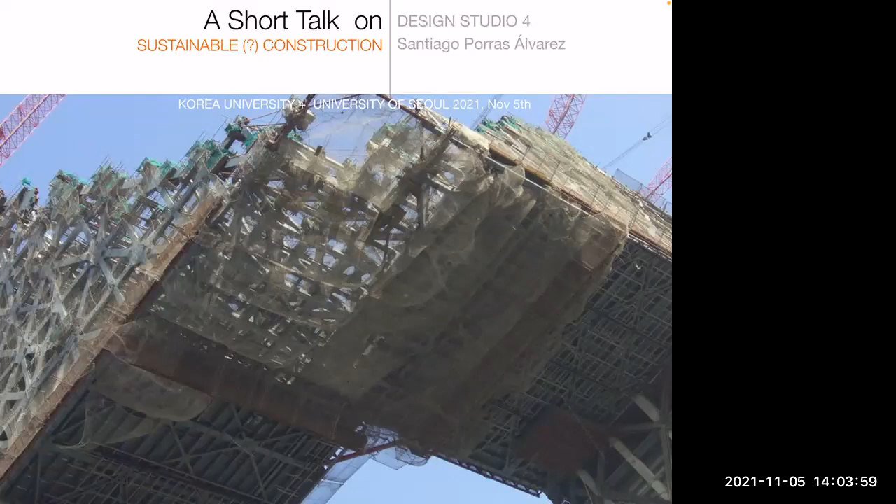Of course, on the cover we have the construction of Beijing's CCTV building, one so-called sustainable building. This is why the question mark comes in. Right now everything is sustainable, and we have to be a bit critical with those sustainabilities.

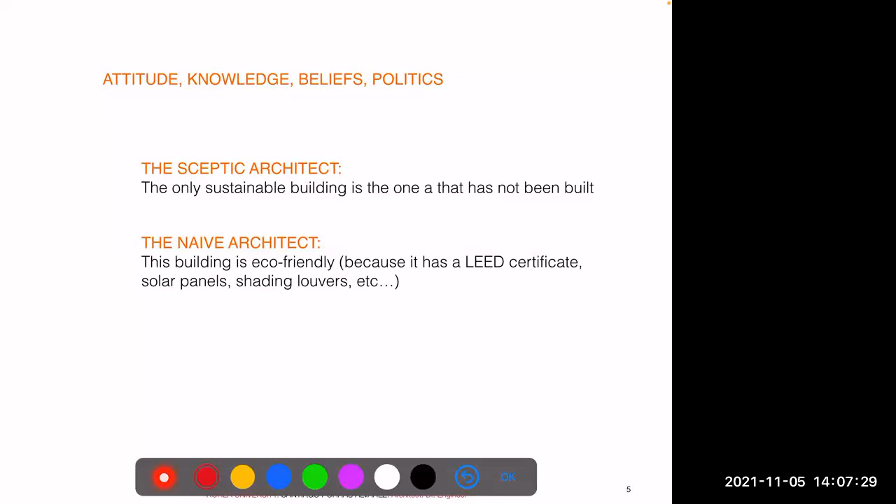We have the skeptic, the clever guy, who says the only sustainable building is the one that has not been built. Yeah, that's true, but it doesn't help us. Then we have the naive, to be kind, who says this building is eco-friendly because it has a LEED certificate, solar panels, shading, louvers. This is quite silly — it confuses gestures and additions with the real thing. So we'll try to avoid both attitudes and go to something more practical.

And of course, what gets published doesn't help. We have the comparison of the famous Seagram building, a masterpiece of modern architecture, which scores out of 100 points. The performance of the Seagram building is 3 — like the worst building in the history of architecture. Then we have the newest, World Trade Center Tower 7, scoring 75 — wow, 25 times better than Seagram. And this kind of success model gets LEED platinum and all the certificates you want. But if we compare it to the Chrysler building from 1930, it's only a little better. I'm not totally being fair because the Chrysler building has been renewed, but it's not difficult to match and even beat the most celebrated building. So there's something that doesn't work here.

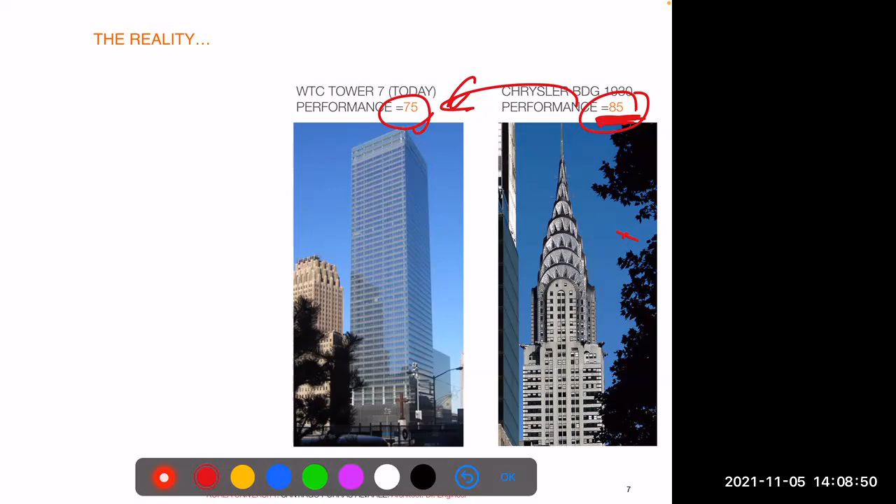So this is why you should be, maybe not totally skeptical, but quite critical about those ratings, publications, and victories of sustainability and eco-friendliness.

And then there are many things which are very difficult to categorize. I, on purpose, took this example — the Burgos Cathedral in Spain, which is my dad's hometown. This is from the 13th century, and it also has additions made later, as we all know.

So there are two buildings which are crazy — they are anti-economical, they make no sense, they would never pass... well, they'd never pass the LEED certificate for sure, but how can we judge them? There are points where a building has stood for over 700 years and become the identity of a whole community.

My dad and everybody in that town is very proud of this building, and they do whatever it takes to sustain it. Can we say the same about those towers, those buildings which are more the glory of the corporation itself? This goes beyond the case, but not everything that is energy efficient is just sustainable in itself. There are many more layers we really cannot comment on, but I have to say it because sustainability is a really wide subject and we cannot get too narrowed.

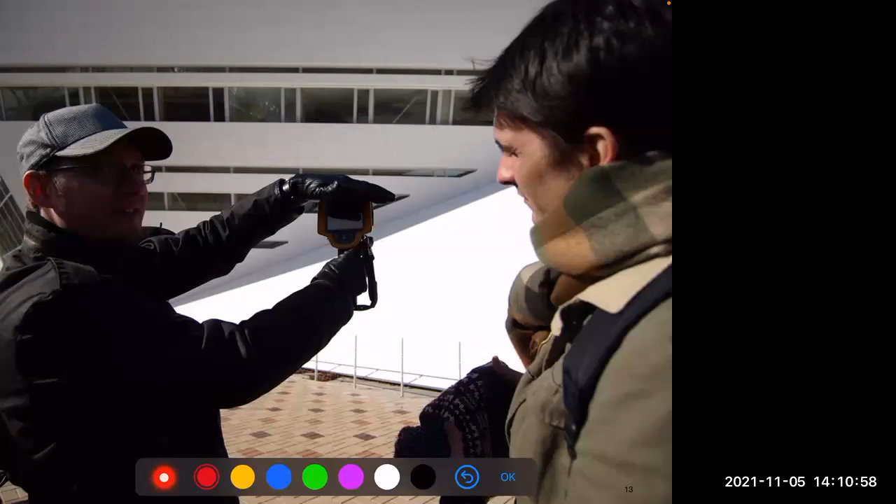The design has perfect natural light in all spaces without too much glare. The design itself took care of natural light, which we know is much better for human performance than any kind of artificial light. Here are the engineers with one of the students visiting the building, checking its real performance for at least two years after construction, because we know projects are not ideal, so very few times do you see that.

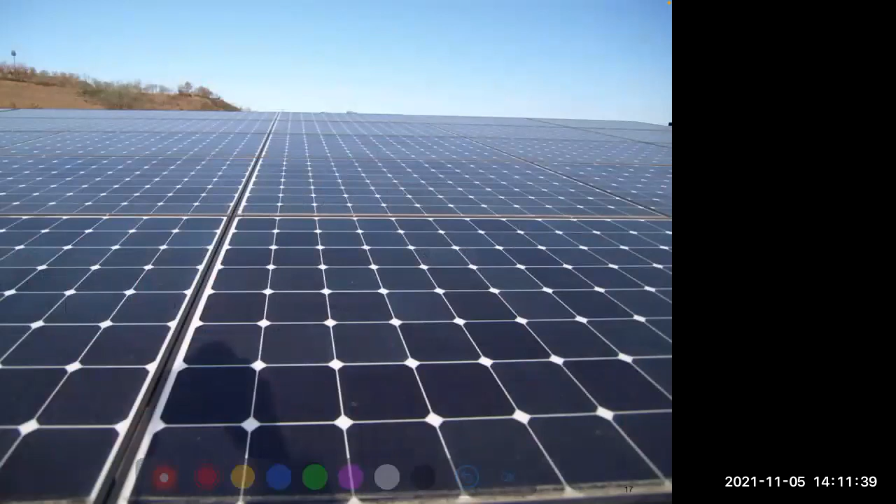It also has automatic shading on those facades which cannot be slanted, so you have automatic shading where you need it. That results in energy savings, plus there's huge insulation. So for the little bit of energy they needed, they have the most advanced systems of green energy and heat recovery, of course, solar panels and high efficiency climatization systems. That saving in active systems allowed for much more quality, much more efficient systems.

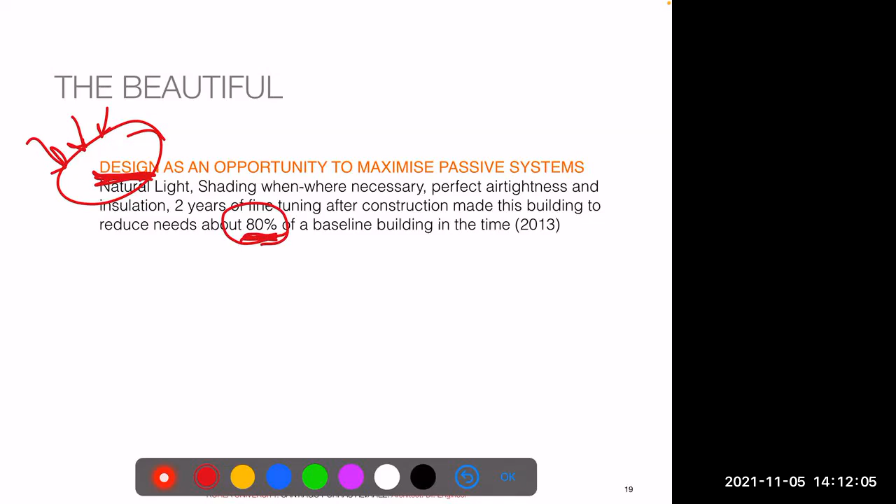So the summary is that design is really important. Before you do any calculation, design may help. In this case, they reduced needs by up to 80%, of a baseline of 2013, of course. But that means the remaining 20% can be applied to clean energies and higher efficiency because you need much less.

Something interesting is the radiant floor for heating and cooling. We are used to the Ondol in Korea, but the cooling actually works very well. If you can visit that building in summer, you have radiant floor cooling on the ground floor, and high-quality air-conditioning on the second floor. You will see the environment is totally different. And of course, it's automatic and so on.

But there are also drawbacks. The building is extremely complex to manage, and actually you need full-time engineers to make it work. That's one of the death points of many so-called sustainable buildings — people are not able to manage them.

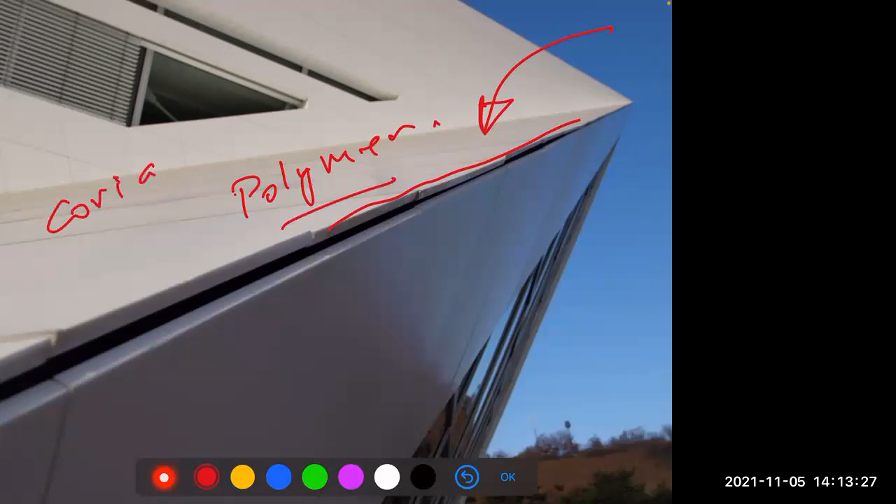From the exterior, one of the students, when seeing the building at first sight, said, 'This building does not look sustainable at all.' And the German engineer laughed. Well, why? It's not only not a perfect construction, which is a pity, but this is a very high-grade polymer — a Corian material which is extremely expensive but has a huge carbon and energy footprint. It is great — you have a ventilated cavity, it reflects light, and it's long-lasting.

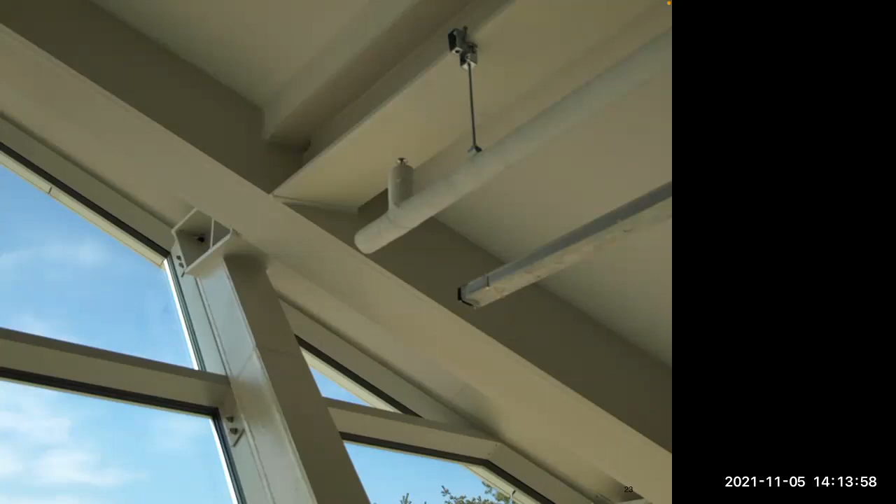But there is a huge accumulation of energy there that will be very difficult to pay back in the life of the building. And there's something surprising: the structure was not a German calculation, and we were all surprised — it was so extremely oversized. Again, this uses too much material, which has a huge footprint, just because of the habit of how things are done.

And we have this small problem we saw later: the solar panels are under the trees. There's no communication between teams, and they are mostly in shade, so the performance is terrible. Management is complicated. This is important because we build for human beings, right? And as human beings, we like to open the window when the weather is good, but then the system doesn't understand it, and the computers collapse, and you have a real disaster there. So it took some time to get used to that.

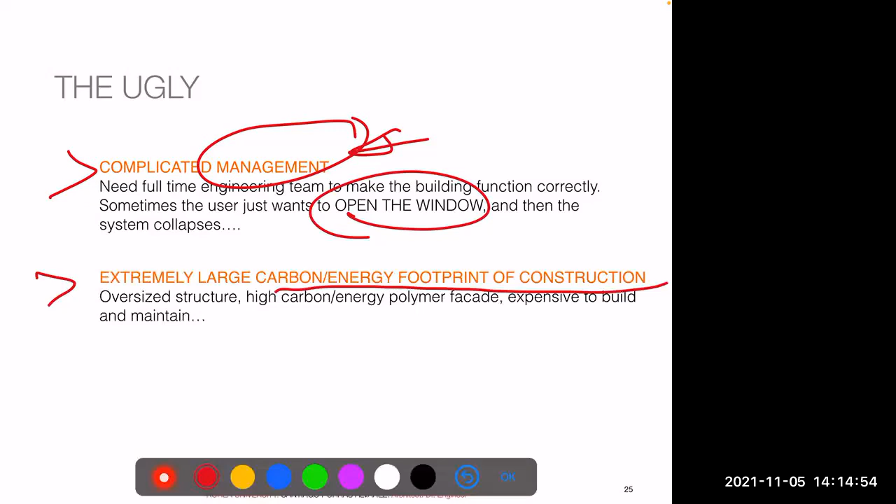Then the construction itself has a huge carbon footprint, and that's not told anywhere. So probably it will take over 100 years to compensate for that, and I'm just reducing — we have some calculations later. And of course, there's the poor coordination between teams, like the tree shading that happens. So what does this tell us? We have a building which is extremely energy efficient — that's a success.

But there are things that do not work actually, right? And it still accomplishes its function. So it's a didactic place, and still we can go there and really learn a lot about good systems. But is it sustainable or not? Well, it's very hard to give a reply, right? It's sustainable in some aspects, could be better in other aspects, but still it accomplishes its function.

And there's many things which are untold. This is like a gossip, so don't tell this out of the classroom. So the first project had an underground building because it's the most efficient thing to make. But government said no way. We need an icon, something flashy. People need to see it. We need a futuristic building. So that's a big drawback, which accounts actually for one of the drawbacks of this building.

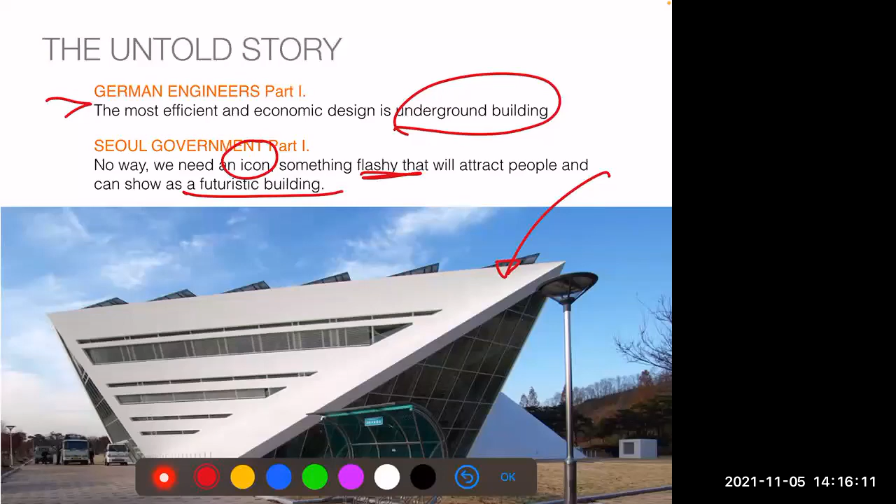Well, actually, the design, except for the graphic design, which is terrible, is quite decent, so I cannot complain about it. I wish we had more like this. And then, you know, the design is finished, all calculations done, we can continue on ourselves. And I hear this a lot here in Korea, especially. The rest we know how to do.

But then, come on, this is too complicated. Let's call back the engineers, right? So this in between also accounted for a lot of mistakes. And this is this kind of arrogance of thinking things are easier than they are. And the engineers came and said, okay, what happened to the structure? What is this, right?

So again, what's the question? Is this building sustainable or not sustainable? Actually, you cannot say just yes or no, right? So we have to see the context of this building, its function, and we have culture, economy, the ecology itself. So many things to speak about. So I wish we spoke more of levels or degrees of sustainability, right? And as in the case of this building, we have to make many trade-offs. It will be very difficult to always make the perfect project, the perfect design.

So the work of the architect, I hate to call us designers, but okay, the work of design actually consists of taking decisions, right? And the perfect project, I don't think it exists. If it exists, it's just an exception, probably a very unique happening, right? You always have to favor some things over others based on the context and the needs. So this is one thing I put in the lesson.

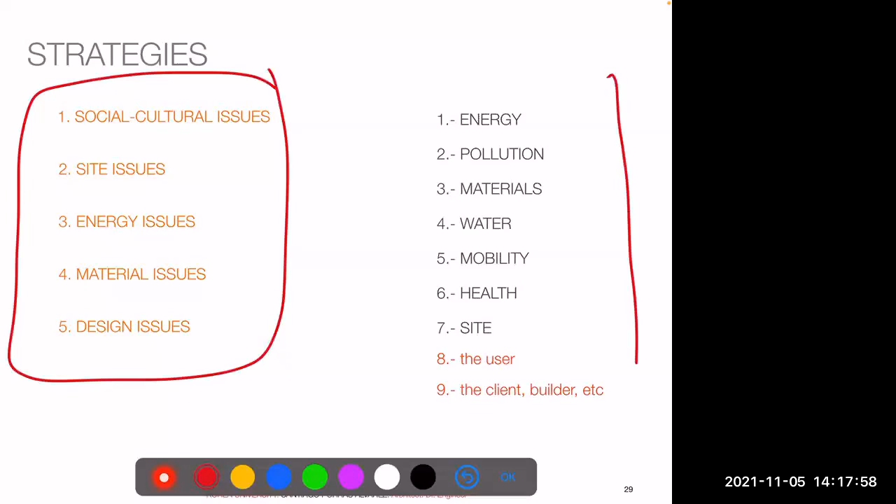So when I teach sustainability, I try to divide it into 5 chapters because I don't want to complicate too much. So 5 is compact. In general, we speak about probably 7, 8, 9 categories. And with relations, everything is related. So it's very hard to isolate problems and treat them separately, right? Everything connects to everything else. And the user, the client of the building, is one of the most often forgotten. So we think everything is design, and as we saw before, not everything is design. There's many things involved there.

Well, still things missing around here. Okay, you can even complete this. So let's go to our project. So you say, okay, it's a very nice talk, but we need to make our project. We need to take decisions to have a good grade in Design Studio.

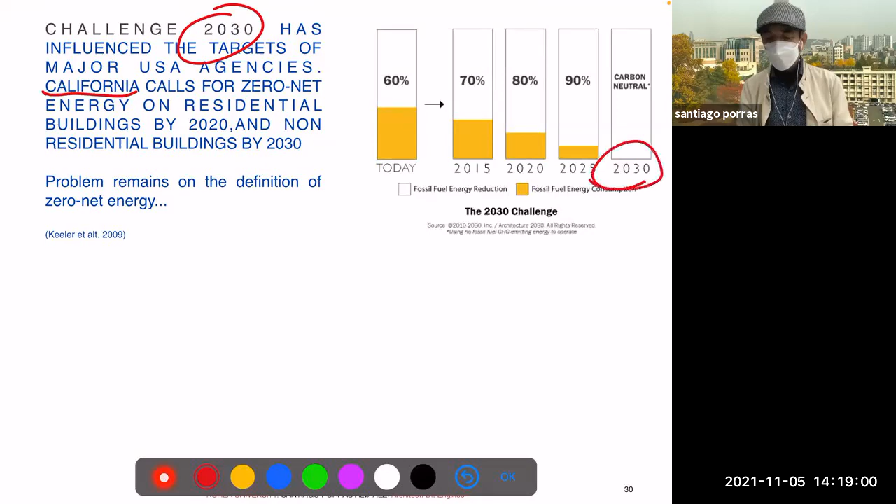So one thing which is upon our heads: the 2030 was something which started in California and was somewhat applied to the rest of the countries. So the idea was to be fully carbon neutral, no fuel by 2030. And the idea was to design better and then to apply, as in the case of the Solar Energy Training Center, green energies to account for that, right? So that's energy and carbon neutrality. Actually, that called for most countries to take decisions to have neutrality by 2030, and Korea is not an exception. We are in 2021. So that means that when you graduate, you will have to comply with those things.

And we are struggling still with the regulation we have now. So it's something serious. We have to save a huge amount of energy. And that's the point. And saving energy means also less carbon emission. What can we do? I will tell you something which is not so much publicized, I don't know why. This comes from research we published like 5 years ago. And you don't need to go into the small print.

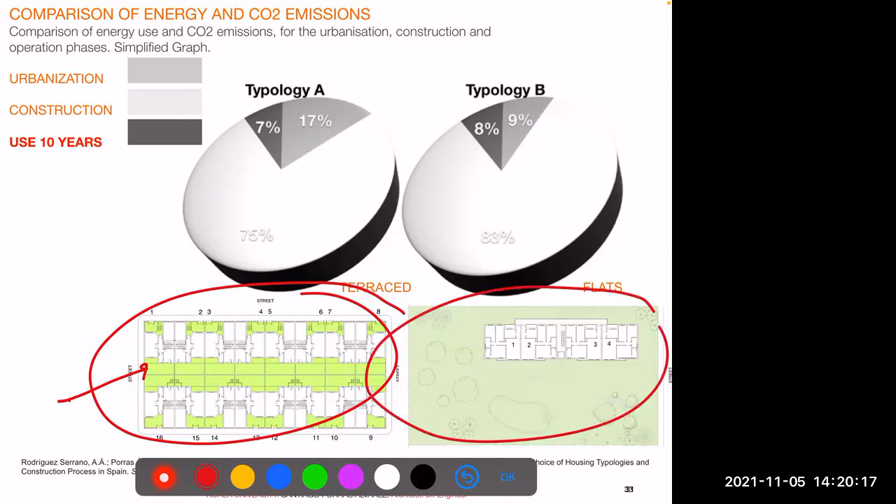We just compared a block of one-family houses and the same number of living units in a small block, right? We compared all the costs in carbon footprint and energy of urbanization, that's making the streets, infrastructure, building, and then the use over 10 years.

The use of 10 years is easy to understand, but also after 10 years, you have renovations, right? And that complicates a lot the calculation. And this is for Spain. In Korea, many renovations start in year 1 or year 2. So that's really hard to calculate.

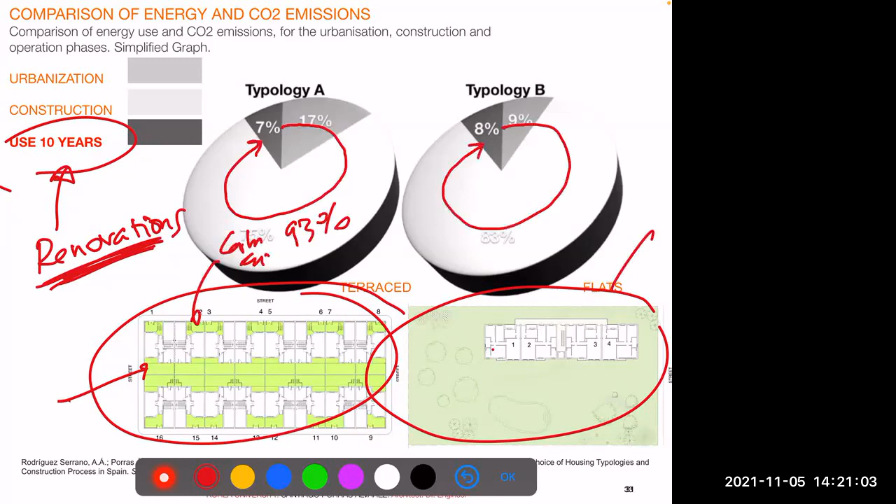But what is surprising here is that urbanization plus construction accounts, in the case of terraced houses, for 93% of whole carbon and energy. In the case of flats, a bit less, but still it's 92%, right, of the total. That means that while we always speak about improving the 7% or 8%, which is the life of the building, say we become even 20% more efficient, that will have a minimum impact, while most of the harm is already done. In summary, it's 92% during the construction.

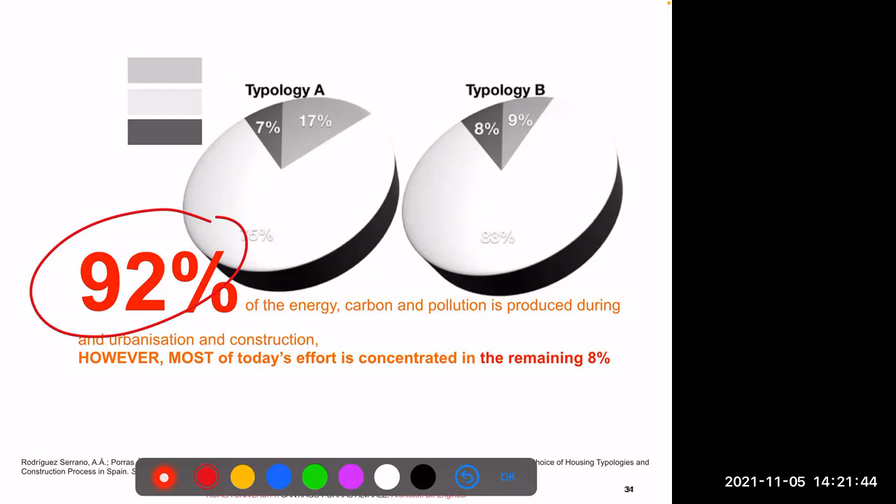That means that the way we design, the way we detail, the way we decide in our project has much more influence than the real performance of the building later in its life. And the research is consistent with it. This is another publication which says the same. The moment the buildings are more energy efficient, the energy lost in the construction is much bigger than the one in the exploitation of the building. And of course, we have to consider the demolition, which is another matter which goes beyond us.

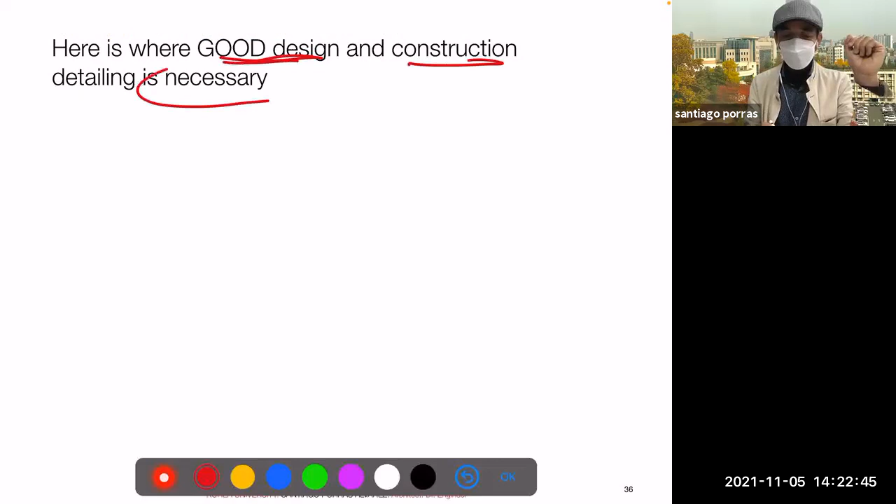Okay, so you know now, if you're sincere about improving the environment, how serious is our work as the ones who plan and project the buildings which are built in the future, right? Because we account for most of the pollution. So good design and construction is really necessary. It's not something that we take for granted and say, okay, we just copy things. We really have to make an effort to make construction better. And not only our detailing and our choice of materials, but how construction is done.

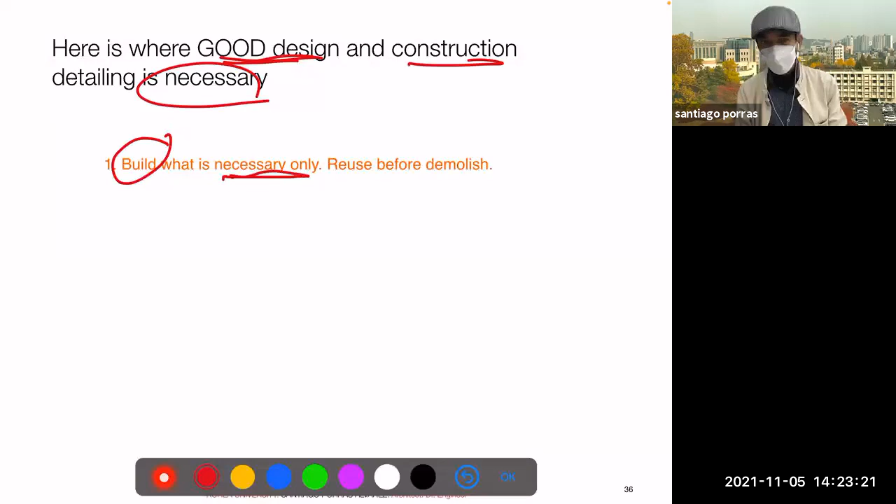You will not see electric powered trucks in the construction site, right? I think it's dirty, inefficient, and enormously polluting. And that happens also with the fabrication. So we have a lot of work to do. So bottom line, that's very obvious, but we have to make sure we build only what is necessary, right? And reuse comes always before demolition, if it makes sense, of course.

Second, building to last. The longer the building lasts, the more we compensate for that initial cost. In the calculation before, we need over 100 years in that Spanish calculation to catch up with the initial footprint, right? Just by energy savings, and probably more. And the more efficient the buildings are, the more that footprint is negative. And that goes to the design. So we have to choose our materials very carefully, both for footprint and life.

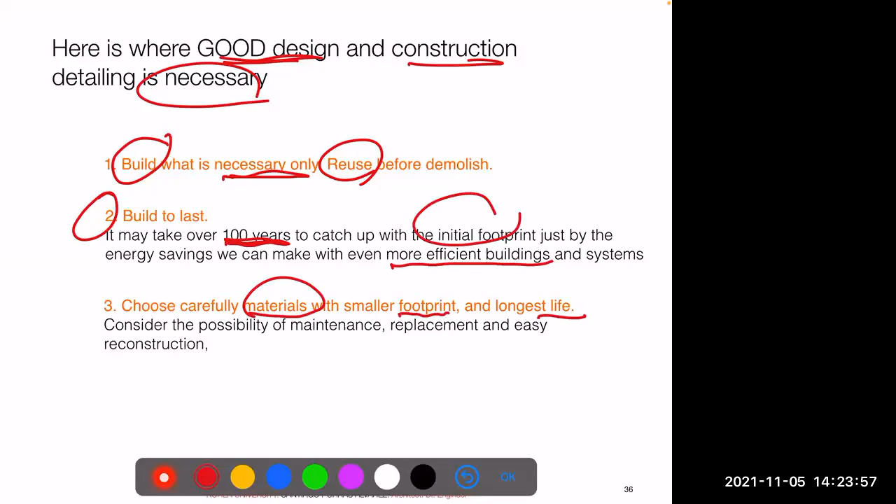And that means also maintenance, possibility to replace, and not reconstruction, but deconstruction, right? This is a concept I don't have time to see here. Here we can go only over general things, and I think I'm extending too much already. But as it happens with cars, the easiness to take one piece out and replace it by a new one is something that many industries used to do, right?

But in buildings, we are now renewing the facade in the building we are in now. You have to make a hell of a demolition, a real mess. And I wonder if the result will be better than what we had before. So things to consider. And then again, I think this is cultural. What is the benefit of rebuilding every 30 years? In Europe, people cannot believe that those apartments built in the 1980s are, in the 2010s, demolished and rebuilt with a quality and a design that will probably need to be demolished in 30 years, because the quality is so low that those buildings grow old.

So we have strategies. First, passive design, right? Once we choose our materials. And the example of the Seoul Energy Dream Center is great. You have the correct use of sunshine, shading, natural light, very important, ventilation, insulation. So in general, you can reduce the needs by 70% or more, only by these strategies, right?

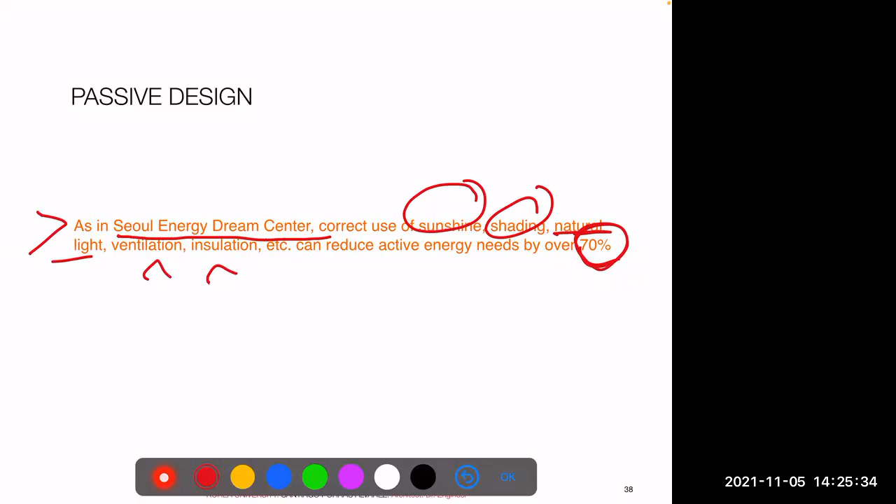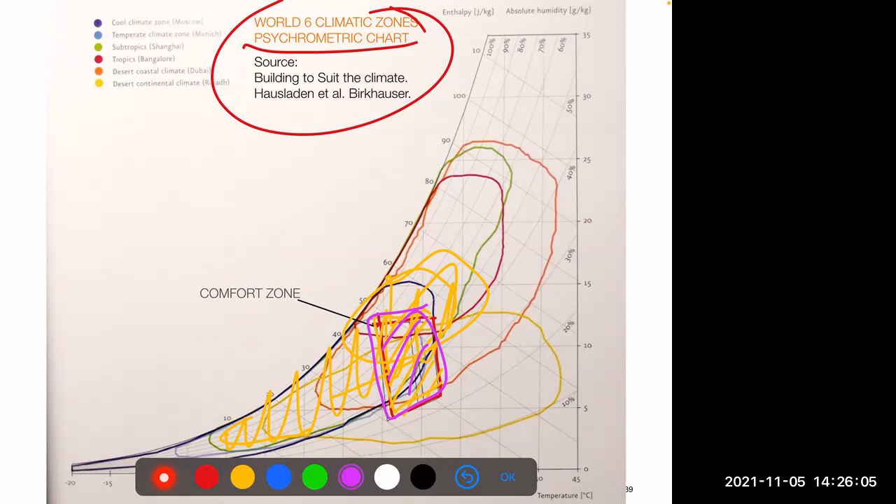And well, it's taken from one book, but that psychrometric chart will help you. So we have a quite wide comfort area. Seoul is a bit difficult to catch here, but probably it's overlapping several climates. Maybe it's around here, right? So in a great part of the year, you can just have a perfect environment without adding active energies. So it would be nice that you are familiar with it, and give the possibility just to open the windows, to use the daylight and things like that. And that makes for a big saving, right?

So as I said, there's no way to give you a kind of system to design sustainably, but I can give you some points, some hints, which affect especially design, that may help you. First is the excavations, right?

We start from excavating, and underground buildings, as in the case of Seoul Energy Dream Center, would have been nice, but how many basement floors do we need, right? What happens to the underground when we excavate? And what happens to the debris from the excavation? There are things you have to consider when you plan those huge and beautiful sunken gardens and those underground spaces for more efficiency.

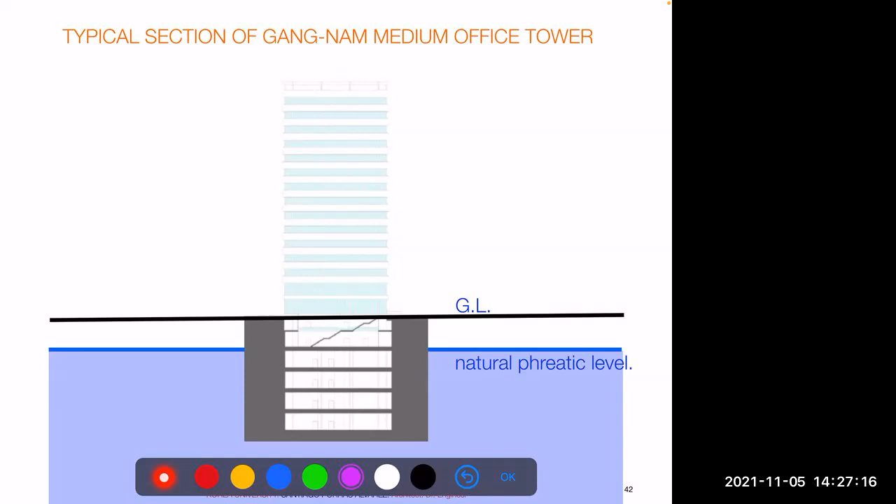This is the section of a typical medium-size tower in Gangnam. Gangnam is riverbed. So you have probably 4 or 5 basements under the water, right? How do you deal with this? The only tool we have now is to pump the water out. How much? We don't know, because we have thousands of buildings doing that.

But if we go to the published material of the Seoul subway, which uses the same system, pumping 24 hours a day, 7 days a week, lines 1 to 5 pump 70,000 cubic meters per day. That would fill the needs of a population of 500,000 people. And deeper, lines 6 to 8, almost 3 times as much. So altogether, in one day, the needs of 2 million people, right?

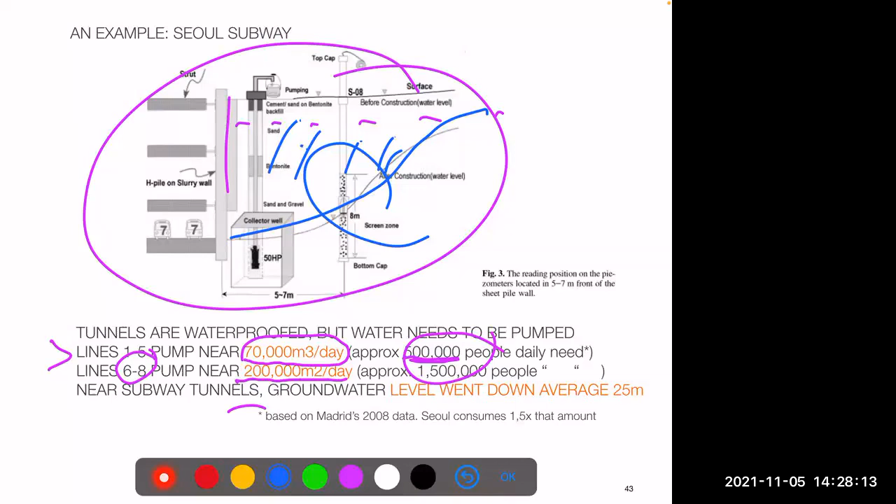And not only that, but when you pump water, the natural ground water level goes down. So you have a lot of imbalances, which alter the geological system. So the decision of excavation is important. And I bring one example. What happens to the soil?

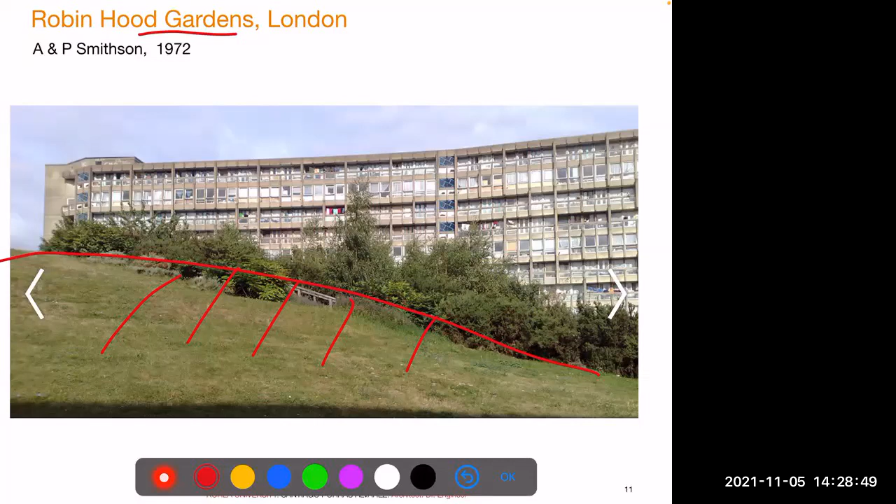Excavating by itself is not bad, but you have to deal with a lot of debris. Otherwise, it will have to be transported to the sea, most commonly, to make Korea larger and greater, but not necessarily more ecological, because that's again changing the ecosystem and increasing transportation and costs. So that's one point.

Second, structure is the second element we build. And probably we can go back to old materials. Those very cool buildings which challenge physics, what's the real cost, right? How much is the cost of building higher? And how healthy is steel? Some questions. There is a rebirth of timber use. Curiously, we found out this great material. And I brought one example.

Yoshiaki Amino is one of my friends in Japan, very much an expert. He studied in Europe with the best experts in timber. 6 years ago he did a very nice house in which structure, partitions, facade, envelope, even roof are done with the same timber logs. He went to the workshop and said, give me the timber nobody wants, the one with the most defects, the ugliest and the cheapest. So he cut it in standard sizes and they devised a way to put them together.

And this helps to make a building. Of course, the design has a lot of very interesting things. But the point is we have only one material. Of course, you have waterproofing and some other things, glass also, things like that. But that's enormously ecological in a place where you have overproduction of timber, for example. That's another matter.

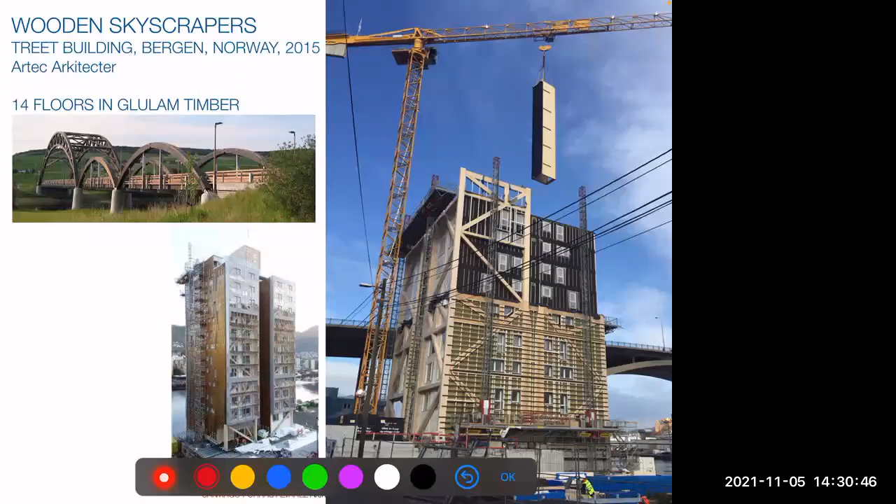And apart from Japan, we have to go to Northern Europe, right? Norway, all of Scandinavia have a lot of experience with timber. So right now, the tallest timber towers are built in those areas. We already had one interesting building 6 years ago. Just this summer, we have one of the tallest buildings. 20 floors is really amazing. So I encourage you to research this, right? You don't need to go very high, but you have many possibilities.

And this is just glued laminated timber and cross laminated timber, plus some steel, right? And some concrete at times. Not sure in this case, but sometimes you need concrete to achieve some fire protection or insulation, and sound protection also.

But that's another thing. But most of it, again, it is amazing. We can have 20 floors with material. And who knows? Toyo Ito.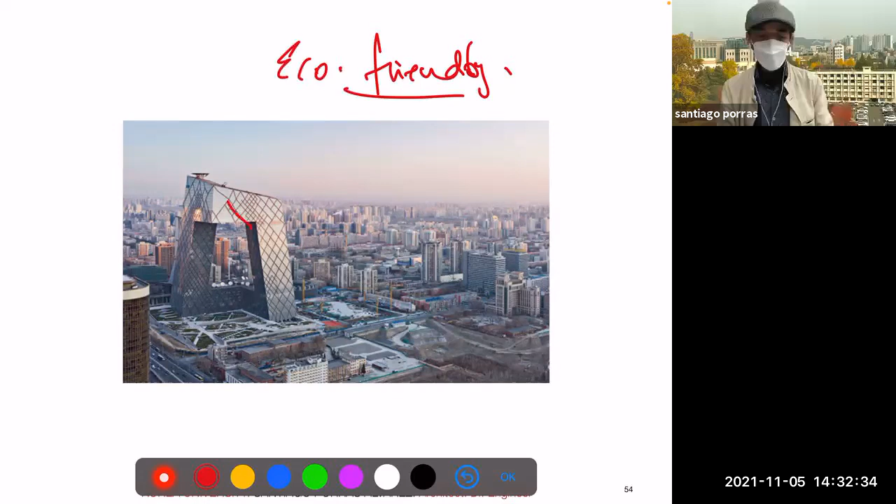If you go to the CCTV and OMA, they did great. And it's fantastic because you see the facade is just expressing the stress of the structure. So the building is expressive. I don't know the guy who works here, he's very happy about it, right? But what is the reality of this?

Okay. The amount of steel used here is humongous, and you will very seldom see these photos. Some guys said this is kind of the steel savings bank of China. When you need steel, you demolish this building, you have steel for a long period of time. And then this is what happens. You have a very expensive tower, but to make it work, you need really useless space, right?

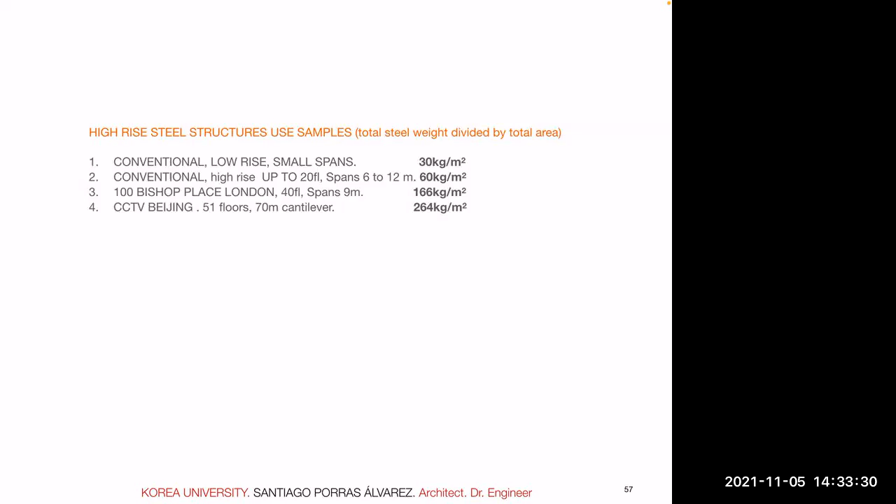And again, compare this with the cathedral we saw before. Right? What is the greatness of those spaces? So, let's go to just comparing data. And I don't know how much we can believe the published data, but a conventional building may have as little as 30 kilograms per square meter of construction. Probably up to 20 floors, which is the usual high rise here, maybe twice as much.

One of the buildings, Bishop Place, I think this is Renzo Piano, which is quite slim and quite well designed building. It has already almost 3 times as much steel. And CCTV Beijing wins all of them, right? So it's like almost 8 times as much as any other building. So you have to be very aware of that.

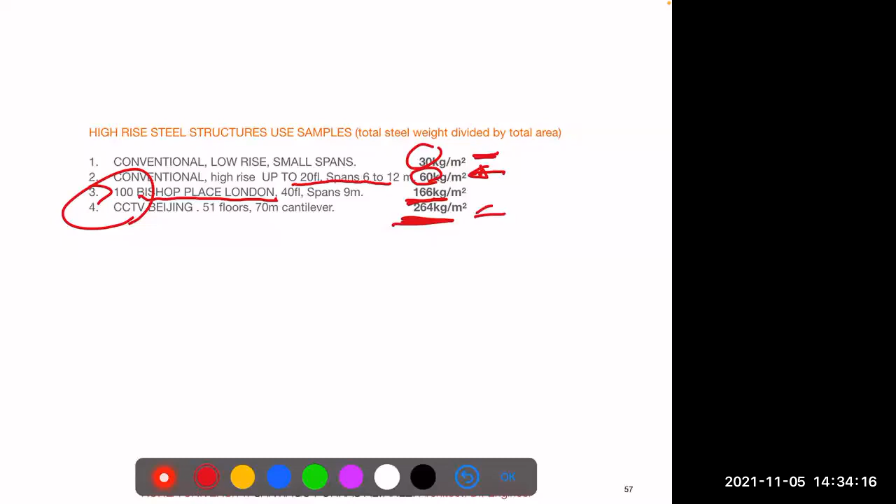Again, there is nothing intrinsically bad in doing high rise, but sometimes we have to see what's the benefit of those crazy buildings we see around, apart from publishing and the glory probably of the designer himself.

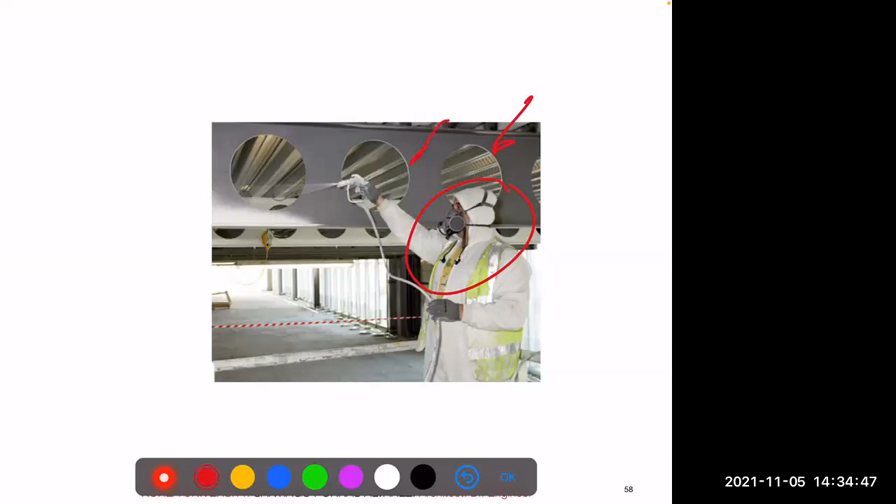And there's one more thing. Steel is very safe and unshakable, but you see how we apply the fire protection systems. Fire protection systems often have very nasty chemicals. So we have to be careful when we apply them and how we conceal them during the use. So we have those beautiful beams and columns, which better we have to hide if we put those materials on them, right?

And there's not only that, steel needs painting. How much? Because painting, again, is one of the most polluting chemicals on Earth, right? Grenfell Tower has to be painted every 2 years. It's no less than 50 tons. How about another of the towers, Leadenhall Tower in London, one of the new ones? I found data. It's 500,000 kilos of paint.

This is about 3% of the structure weight is painting. The good point is that this paint probably will remain for a long time. You don't need to change it every 2 years, right? But it's something which we have to be aware of.

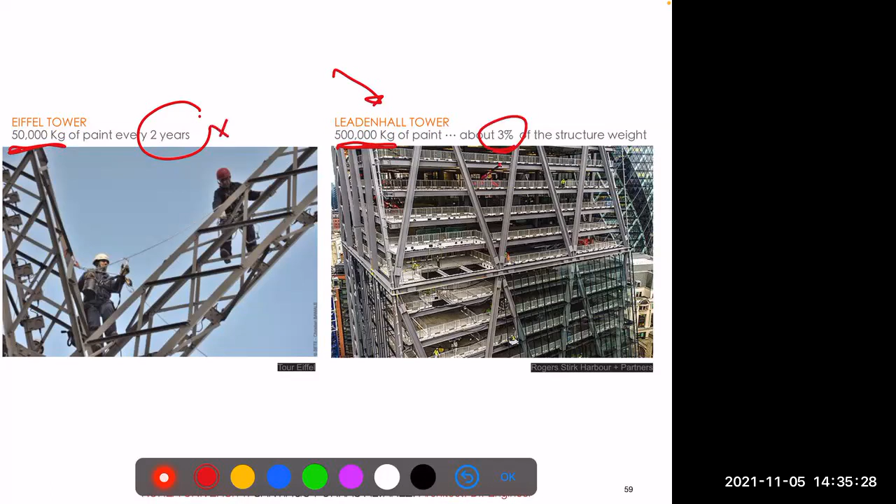Let's go to the envelope, which is the next part where we work. And because we have not much time and I don't want to overwhelm you, I left out all the interior materials, but actually interior is a big thing and we create the spaces, so we should talk about it, but okay, we don't have so much time.

Again, there's a lot of publications, so I encourage you to find information, to get educated and use the handbooks. This is one very popular example, Building to Suit the Climate. This is mostly a handbook, right? And you don't have much theory there, but it's kind of useful. There are plenty of those for you to become better.

And then you have a set of strategies you can use with the advantages, the inconveniences, how they could adapt to different standard climates in the world. This should be the starting point, right? And again, you have probably all possible standard strategies, but not always they are positive or necessary or adequate. So you have to really educate yourself. There's not any pride or benefit in being ignorant, right?

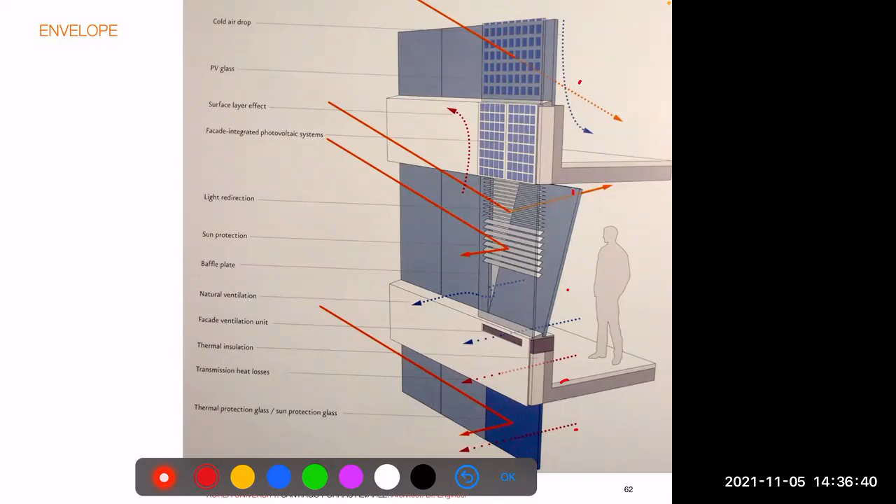So really, you depend so much on your own knowledge and understanding of things. Then the handbooks help. I will give you an example. I'm very shy to show my work, but I did this in 1985. In 1985, I had just graduated, so I did not even know the word sustainability, because actually I think it was defined a year later. So it's a small house for my family.

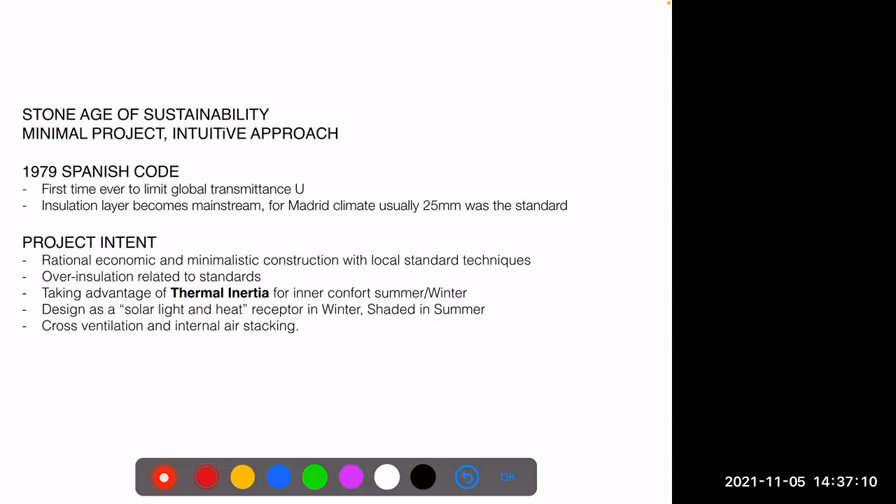And at that moment, I think it's common sense. You look for sunshine and try to put in a lot of insulation. In 1979, six years earlier, it was the first time we had a code limiting the transmittance, the U-value. At that time, 25 millimeters of EPS was the standard. Before that, we never used insulation, right? Things changed so much in those years.

And the intent, of course: minimalistic construction, standard techniques, over-insulation for that time, thermal inertia, because the difference of temperature between day and night is enormous there. To have solar light and heat in winter and shade in summer, cross ventilation and stacking. These are things that I think are just common sense, right? I feel shy just to repeat it. It's the kind of thing that anyone who ever lived in a house should know.

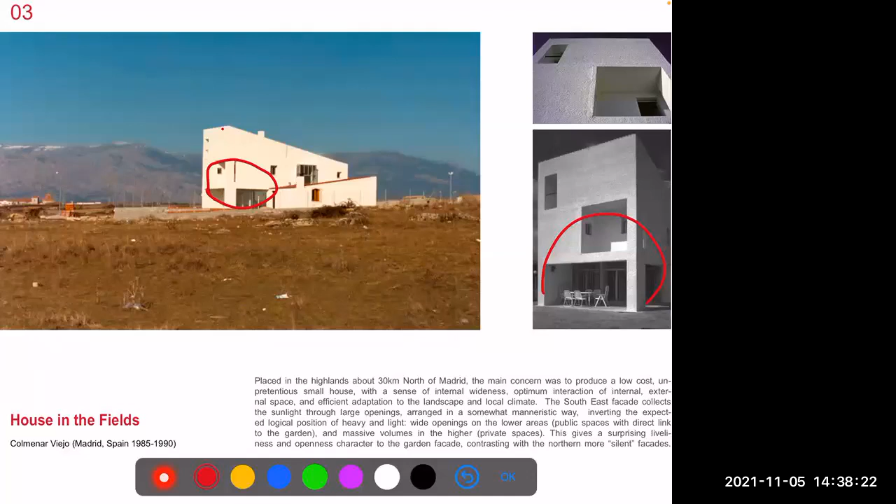The building is quite simple, actually. It's just a very simple volume. Open mostly to the south, southeast, right? The north almost completely closed. The design did not calculate the shades; that's the intuitive thing. And the thing which was unique here was the section. It's very clear, I did it by memory.

It was just a load-bearing wall in brick, 1.5 brick, 32.5 centimeters, an air layer with I think 5 centimeters of insulation, and then an outside brick with render. So the insulation part was on the outside. You have maximum thermal inertia on the inside, right?

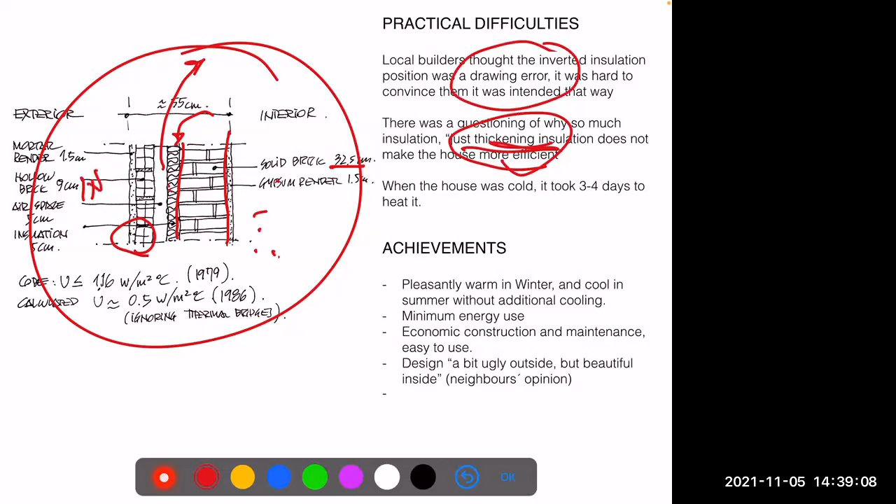At that time, the construction company said this insulation is too much. What is the need? You're wasting time, wasting money. And they thought that I was mistaken, that the interior was the exterior, right? I had to tell them, no, we're building the opposite way this time. But actually, it works. It consumes very little energy. You have a very nice climate, and it's extremely easy to use and cheap.

And people, the neighbors, said the outside is ugly. But I saw the inside, and it's so beautiful. I didn't show the photos of the inside; you may have a different opinion. Right now, we sold this house, it has its third owner, and it has been renewed. That means after 35 years the house still keeps its life and we don't need to demolish it. Well, not because of me, but now life is much more complicated, right?

So we have to design good envelopes, but we have a huge amount of challenges. And one is the codes. The codes help, but they are not the solution. They are the bottom line. As we did in 1985, sometimes you have to think away from the code and try to find the ideal. Also, you don't always get it right. This is something that happened a few years ago.

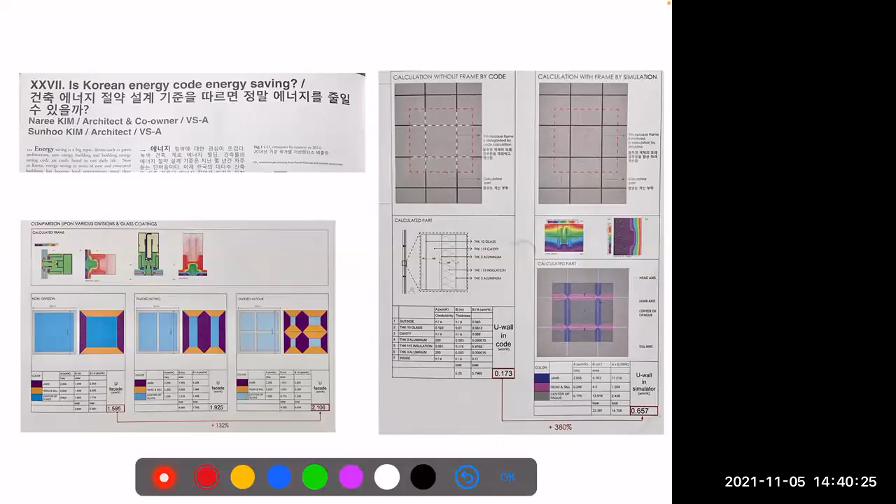It has changed, but Naree Kim and Sunhoo Kim, friends working here in Seoul, questioned the regulations because the simulations did not match the code at all. They found out that the code was very insufficient. Where you had a U-value of 0.17, actually the value was 0.6; you had almost 4 times as much energy loss. This has been fixed, but it's good that somebody thinks beyond what is published. Don't think the codes are always perfect; we should always try to improve them.

Second, as we said, design is one thing and construction is another. Design is about intention, right? In Spain, we like to use the word project. Actually, the design studio is projects, because this is a projection into the future. It's like you have the future and you draw it now. So you're advancing the future, you're guessing the future.

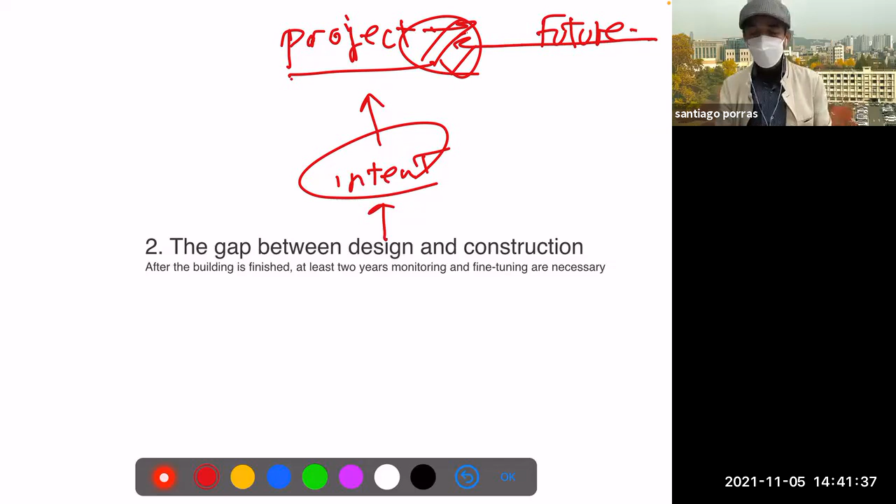That means the future is something we can only guess. So construction and how people use the building, right? Construction and use are something we never know. So we have to be very aware of that. No matter how strict the code is, no matter how perfect our simulation tool is, simulations are always simulations. Reality is always reality.

This is what happened, and I think it's one of the good points of Seoul Energy Dream Center. It was checked, and it had to fix a lot of things. This is one of the most embarrassing examples, but it happens every day, right?

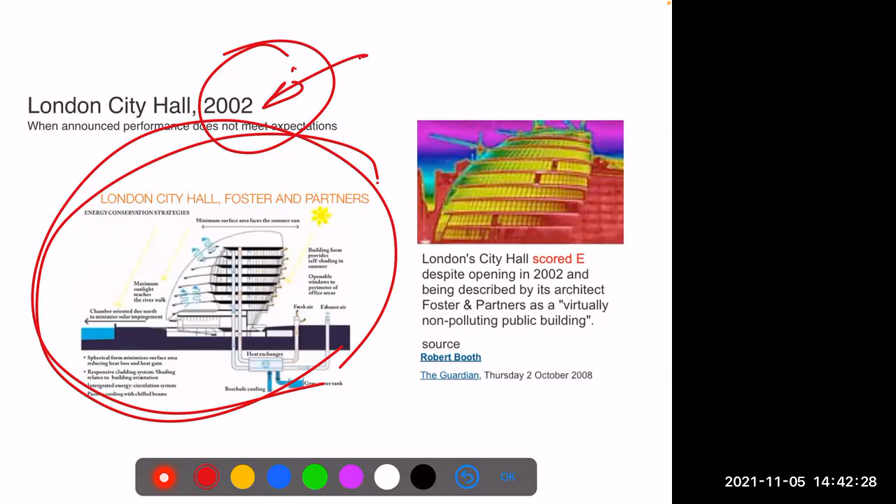Then we understand that insulation is the base. This is one of the important things to keep the energy inside, but our technology is quite limited. We are almost at the limit of what we can do with the insulation we have.

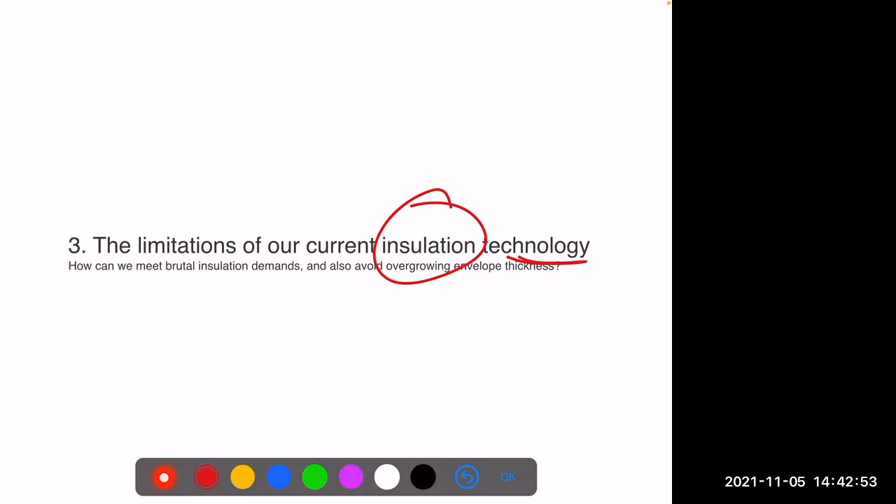Of course, we have foil insulation, but I cannot help you here. I have received visits from sellers since the late 1990s telling me this is great. When I ask for the certificates and experiments, they never give them to me. And this is what they use in the space station and so on, but it's very specific, very much experimented and a very controlled setup. Buildings are a mess. So the bottom line is that foils need to be in an enclosed cavity. And even so, US codes give them a resistance of 1 for cold regions and 2 for heat, apparently it works better with heat. But again, this is just codes and it's kind of empirical. We don't know very well.

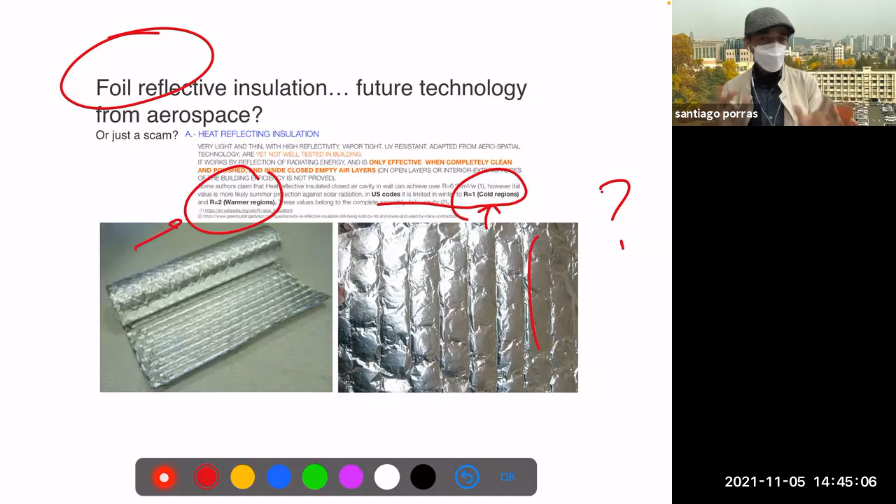So it may work. The problem with reflecting insulation is that our insulation calculation is about transmission, and we know the physics of that. About reflecting, and how it affects the interiors of buildings, I don't think there is yet an agreement or a clear formula. So this is something you may consider because it's really thin. That's great, but I'm not sure about how efficient it is.

New materials, aerogel, that's great because it is non-flammable, fantastic. It is very insulating, but terribly expensive. Still, you can use it in small areas, difficult parts like thermal bridges and so on, and it will help. If we compare fiberglass with aerogel: with fiberglass we need 20 centimeters, with aerogel we may manage with probably 6 centimeters or so, which is a big difference. But at some point, when you go past 20 centimeters, I don't know if we can afford that.

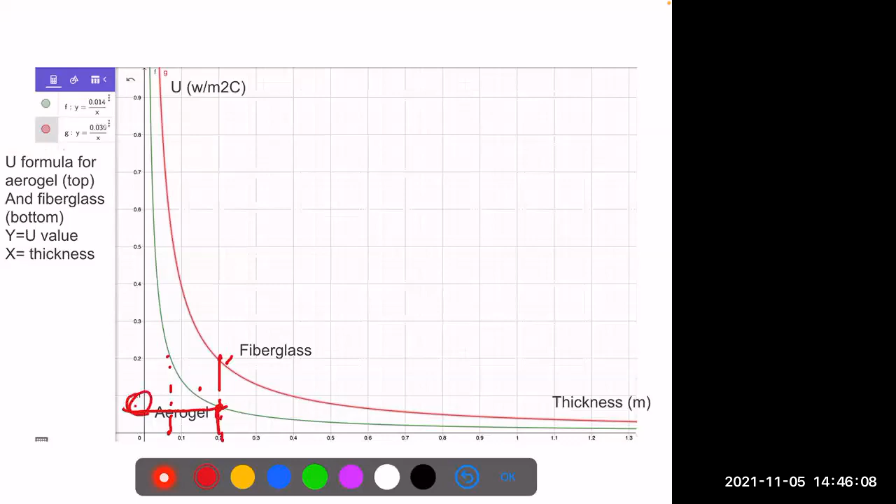You see that the real benefit is very small. So again, with insulation we can only do so much in a very small way.

It is all due to the use of those flammable materials. Ichon was a bit different because it was a flammable material used in the interior, which is quite a pity. How can people die because of an interior construction in one apartment in a building?

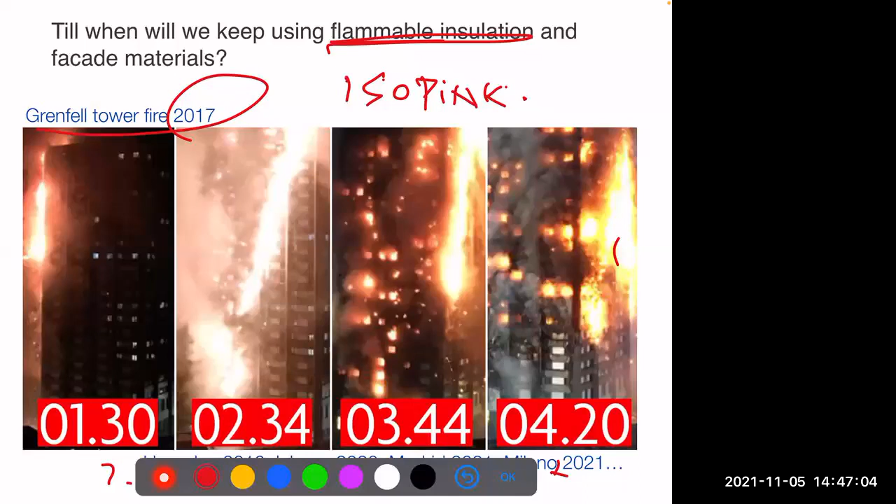Anyhow, Korea is probably one of the few places which still allows these flammable compounds in facades, and that's a problem. This is what they said about the Grenfell Tower too. We have the AlucoBond, which, by the way, is the material we used in our newest building, the new engineering building, which I contributed to with my salary to build, and it has this flammable AlucoBond in the facade.

So, can be proud. They said okay, had they used AlucoBond Plus, which is fire retardant, with retardant core, probably it wouldn't happen. But you see, plastics are never fireproof. You have retardants only, and those retardants are chemicals that probably kill you before the fire exposure does.

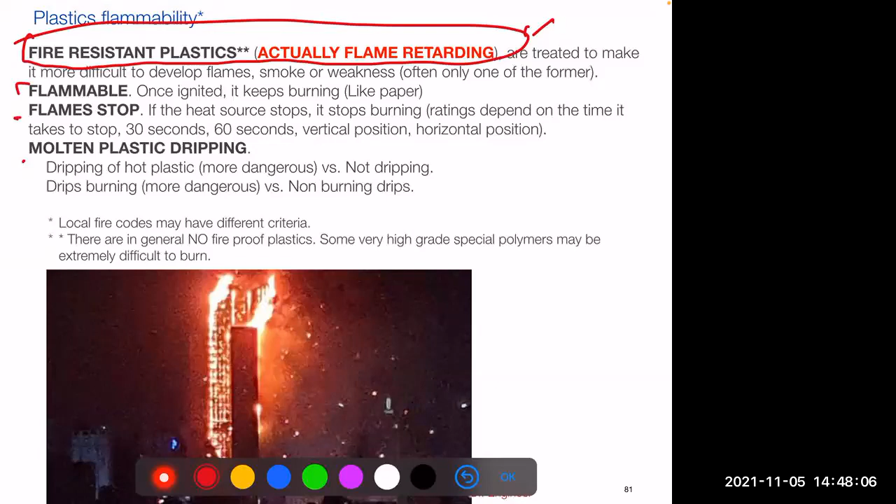This is taken from my materials class. So fire-resistant plastics are actually just flame retardants, and there are things you have to take care about. Be very careful with plastics in facades. I have very good friends who do fantastic buildings with plastic facades, but I wonder how they deal with fire.

Okay, then we have glass. Double glass is not the norm anymore. We need at least 3 layers of glass, and I don't see it being used much. Here's a comparison of the interlayer of argon or krypton. Krypton is more expensive, argon is expensive already. Krypton gives you an advantage, better insulation value. If you use krypton and 3 layers, you win over any kind of glass.

So that's great, but what's the problem? If we have triple glass, we lose, at best, half of the light coming inside - in many cases 70%. That is very good quality glass. I've seen glasses in the market where you only receive 50% of light. So if we put windows for natural light, but need so much glass for insulation, and still need artificial light all the time, what is the advantage?

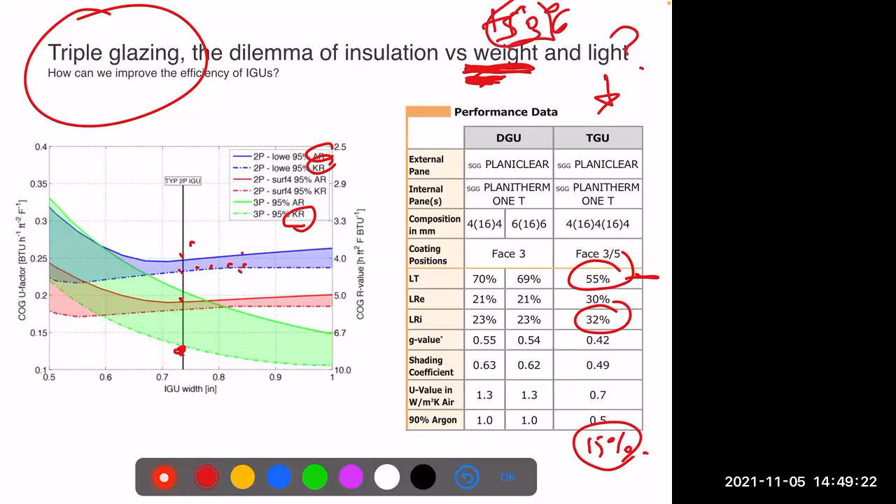And of course, glass is heavy. Glass is like a stone, and sheets of glass weigh a lot. Plus 50% weight in glass will affect a lot, especially in high-rise buildings. Towers are very sensitive because you multiply that weight by a lot of floors. So we have another bottleneck.

This is the World Trade Center Tower number 4. My associate, my professor, so I was able to sneak the detail from his office. I couldn't take photos, but I sketched it. You see, it has 4 layers of 8 millimeters of glass - that's 32 millimeters total. Try to look through a 32 millimeter glass stick. So this is very special glass, with all the coatings and fabrication, which allows you reasonable transparency in this building.

And of course, almost 20 centimeters of insulation in the spandrel, just to achieve the value you need. So those towers we see everywhere with just a double layer of glass are kind of a joke in terms of energy performance. We have a new technology.

So thin glass is a new product. We can have glass less than 2 millimeters. It is still not commercialized. And I'm losing the battery.

Just a moment, can I have a battery extension? I can do it myself. One second, don't run away. You see, energy...

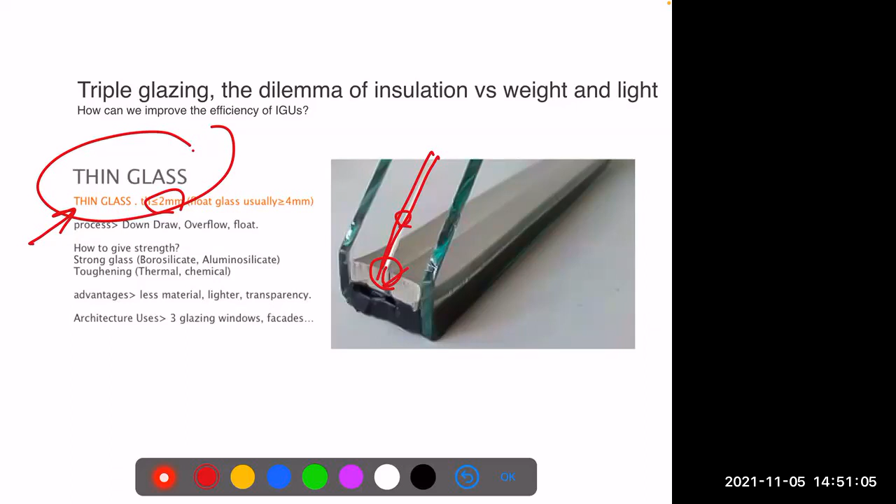And of course there are more ideas. I have some things - again this is stolen from published material from my friends - but it's nice to see people trying to think out of the box and find solutions for difficult things. How can we reduce thermal bridges? This is a small idea: just having the glass together with insulation, with a fixture that doesn't need the typical frame, so you have glass in continuity with insulation.

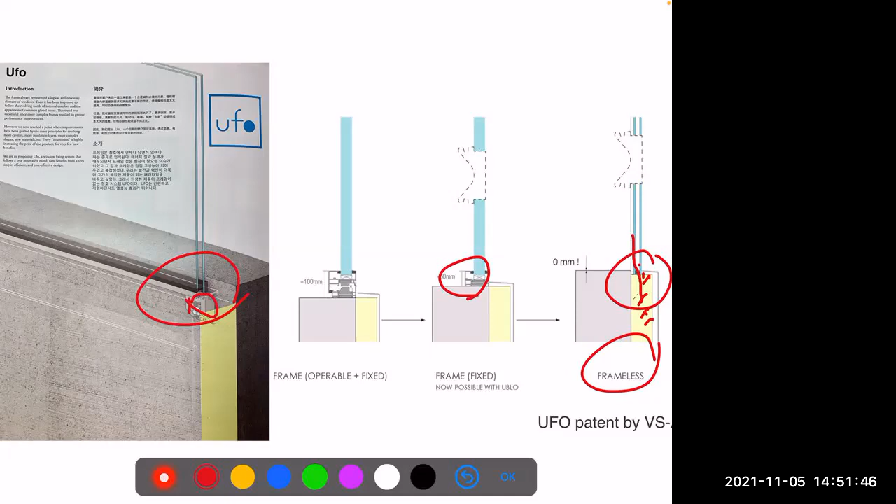And that frameless glass, apart from being nice and cool, needs to be tested. This is a product that has been designed, produced, testing prototypes, so you know it works. It creates a very nice compound without the silicone we see everywhere, and without much fuss. Okay, small idea, small detail, but you need to develop it and see how it works, and see the publications to see the performance.

So they achieve almost half the transmittance compared to standard plastic PVC. We complain about plastics, but actually PVC is quite competitive, giving reasonable insulation at reasonable cost. And if the maker recycles it - not all makers do - and you use it for a long time, it makes sense. Again, we cannot say good or bad in terms of sustainability. Things may make sense.

So you have the system of construction and the simulation - of course you make simulations, and those guys are good, very serious - but then you make the prototype and test it in the laboratory to see how it works.

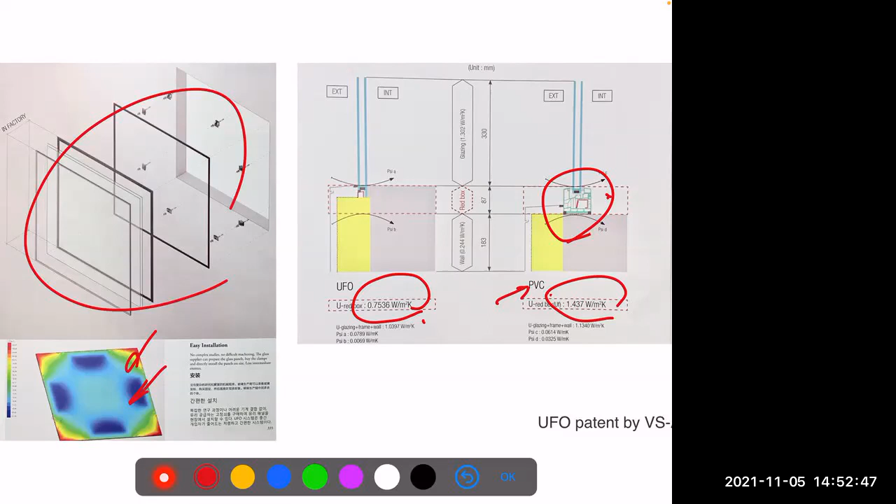Again, fully mechanical controlled ventilation. This was the paradigm in most construction now. Even in Spain, we are told we shouldn't bother anymore about opening windows because ventilation will be mechanical, so why not use only fixed glass?

The second thing is that they usually have filters, which is good for allergies and so on. But if you filter, you have an effect on the interior microbiome, full of bacteria, viruses, fungi, and so on. If you totally enclose the exterior, those bacteria overgrow and you have a terrible environment. If you have exchange with the exterior, you have other bacteria coming in and they find some kind of balance. But the moment you totally isolate it, you have a worse environment than if you just opened the windows.

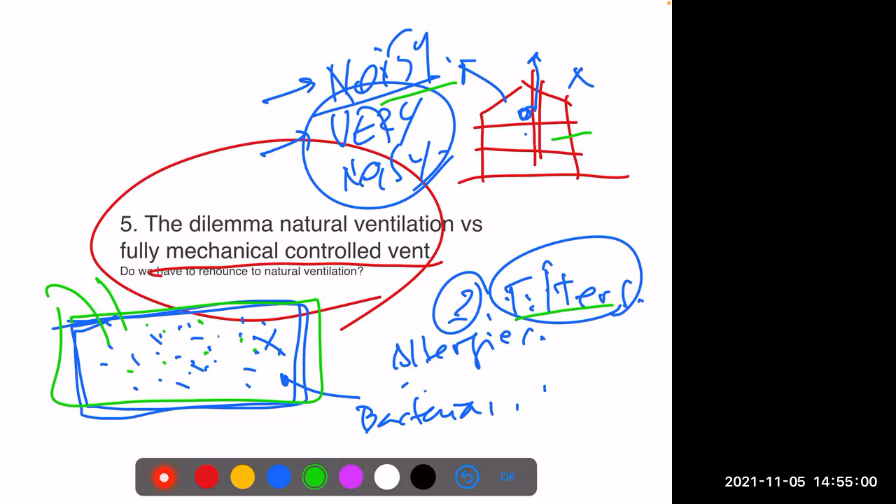Again, we speak of Korea's nice tradition of opening the facades totally to have plenty of air in summer, then making very small rooms with ondol in winter, so you can heat it with almost no energy. Yet we make buildings which can open only a tiny fraction of the window and work only on mechanical ventilation.

This is the Samsung apartments, very expensive. I know somebody who went to live here. After the first summer, they left. Because of course you can put air conditioning in summer, and maybe it's not so expensive, you can pay for it. But being under the sunshine with air conditioning is like being in a bus or car under the sunshine with the AC on. It's terrible, right? So there's no way to live there.

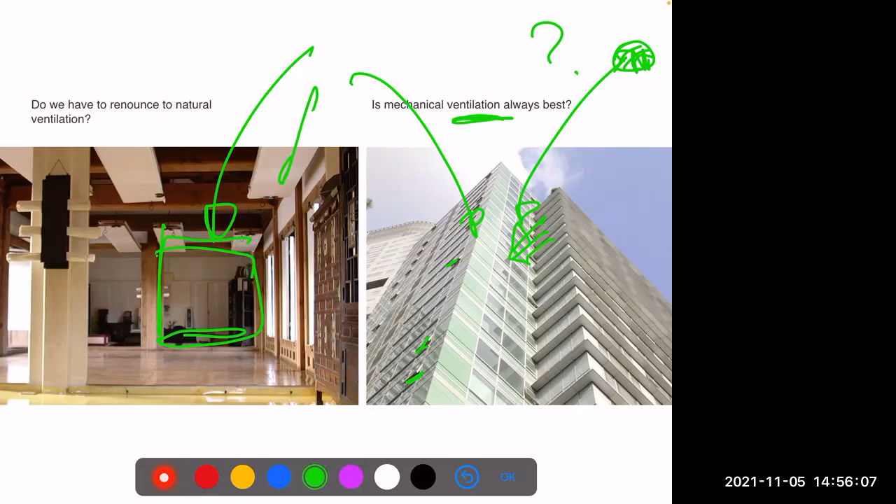So when you design your facades, and I guess many of you design towers or buildings with huge windows, plan very well for it. Tradition, if you see any hanok or old building, without anyone telling you, you will recognize the north-south facades, because they work differently. But in many buildings we just produce the same facade on all four sides, and that creates a lot of disasters and very uninhabitable spaces.

Of course, we have beautiful projects, and I think the open air school was something which came from the old pandemics, actually the need of ventilation. And what is bad about having people in open air, if the exterior is healthy enough?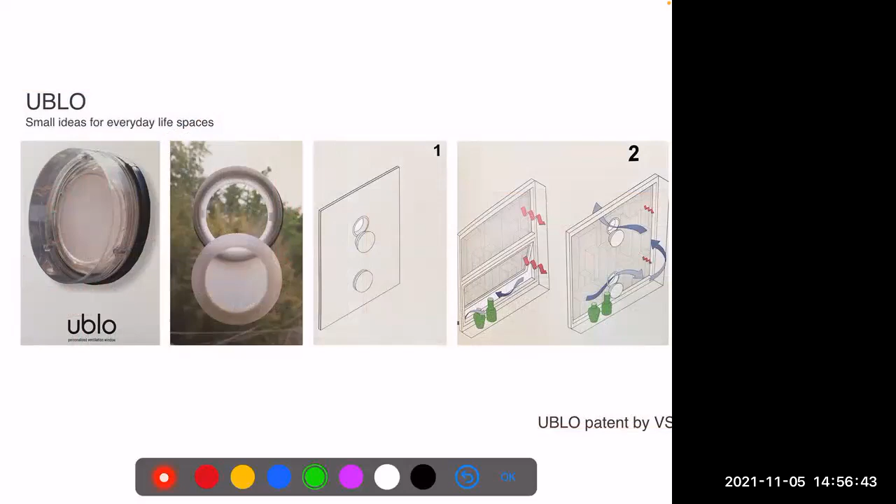Again, we have small ideas, and then we go to my friends of VSA, the UBLO, in which you can have small openings that just take care of the minimum ventilation without needing to open the windows. So opening the windows is always nice, but you may have this kind of minimum air without fans. You can decide on the filters or not, and make sure you always have a healthy environment.

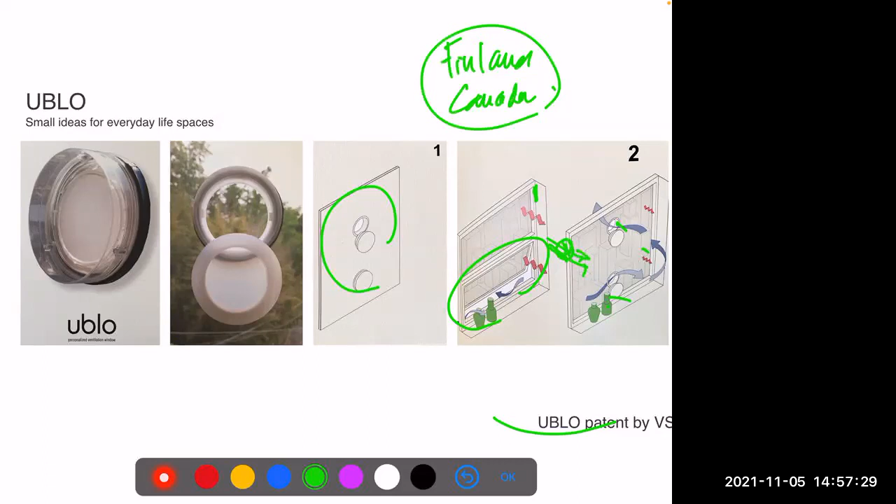There are many more things. We also have air filters in the sash or frames of the windows, which usually come from Finland, Canada, all those countries that have so much cold air that they know you need ventilation, so they have this kind of filter. If you see, for example, Villa Mairea by Alvar Aalto, it has windows which are glass and a small window which is just solid timber, open only for ventilation.

So you have this kind of element which ventilates. You don't have such huge opening, so you can have new air without having a big energy loss. Again, these are small things that may make things better than the usual, right?

And then I think we go to the end of the lecture because I promised 1 hour. And also we started a bit late. We are almost close to the 1 hour time.

The clean energy. And this is one of the things we often say: this building is great because it has solar panels. You have to check, okay, yes. But what's the function of solar panels, right? Most times they're just decoration, or they're just putting light to the small LED you have in the facade, maybe accounting for 0.001% of the energy of the building.

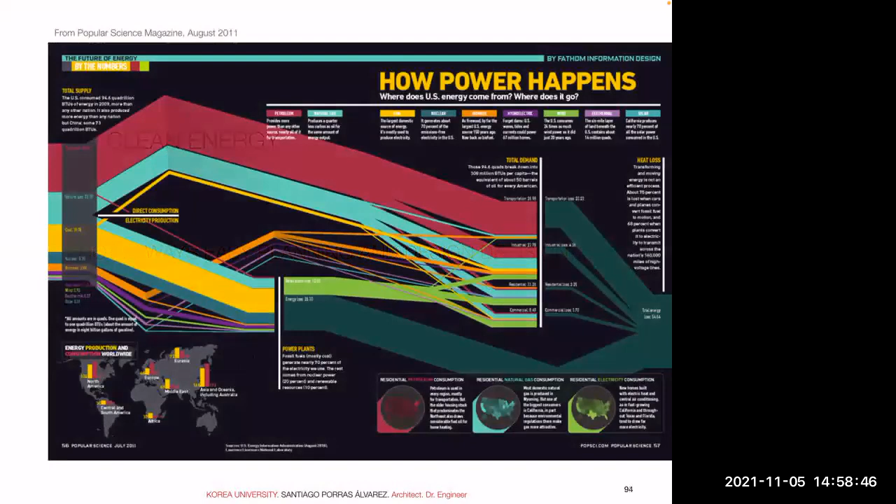So again, clean energy, as in the case of the Seoul Energy Global Center or Dream Center, made sense because it is produced, but it's not always an easy decision. One thing that may encourage us to use clean energy is this, something published in 2011, but still actual.

It's about the energy produced in the US. Beautiful graph, actually it's a very classical way of doing, but it's a way to show a lot of data in very few numbers. It shows that clean energy is a very small part of the full energy, mostly it's coal, gas, right? But the important thing is here, we have over 50%, probably more than that, I cannot read the numbers, is lost forever before you can ever use it. And this is already in the 21st century.

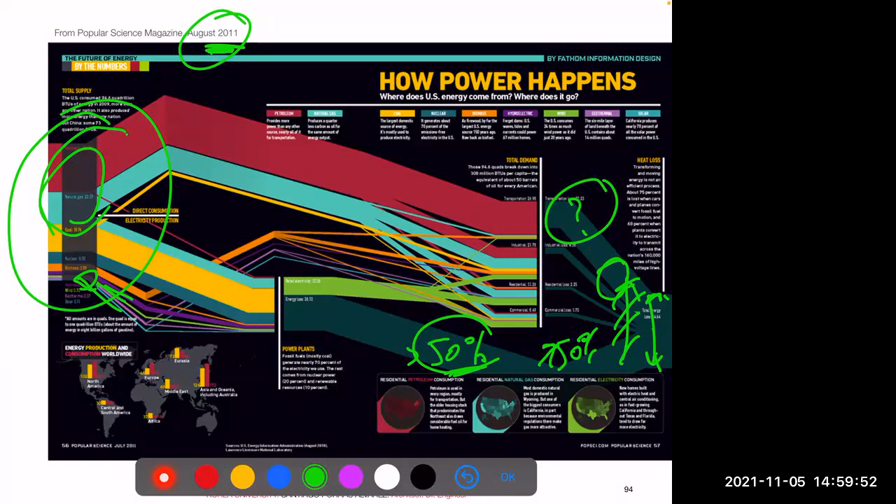Our technology for energy management is so poor that we have to produce twice as much energy as we need. If we can solve this, we suddenly have twice the energy we have, which is big development, but we don't know how to do it. One of the things to avoid this is to use self-generated clean energy, which at least has no transportation loss, right? It's one thing we can consider. And because really it is difficult.

This is an example I borrowed from one of my colleagues here. Actually, Professor Won was working at SOM, and she took charge of this building. So it was a very serious study of a turbine in one of the towers of SOM. And it took months and many hours of study. And those turbines you will see published in places telling, come on, they have turbines, they are so green and so great.

Well, after the study, it was helping only 0.003% of the total energy consumption. So there was not any point of using that. You put the hole only for decoration or to show things, but there is no use of that. So you need, of course, to have the idea and test it. But if the numbers do not work, reality will probably be even worse. So careful with those things. Don't believe every image that is published.

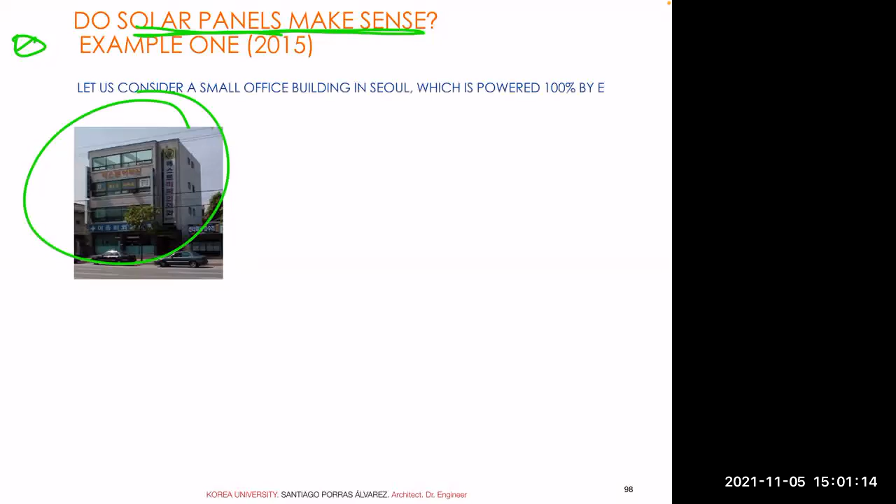And I will put something more pedestrian, more everyday. This is one exercise I did in a sustainability course, right? To see about solar panels' reality. We took a 1,000 square meter office building in Seoul. We didn't need to go to the small numbers. The idea was only to have 50% of the energy by solar panels. You have the area and the energy consumption and the cost based on standards of Korea by 2015. So 50% of its energy.

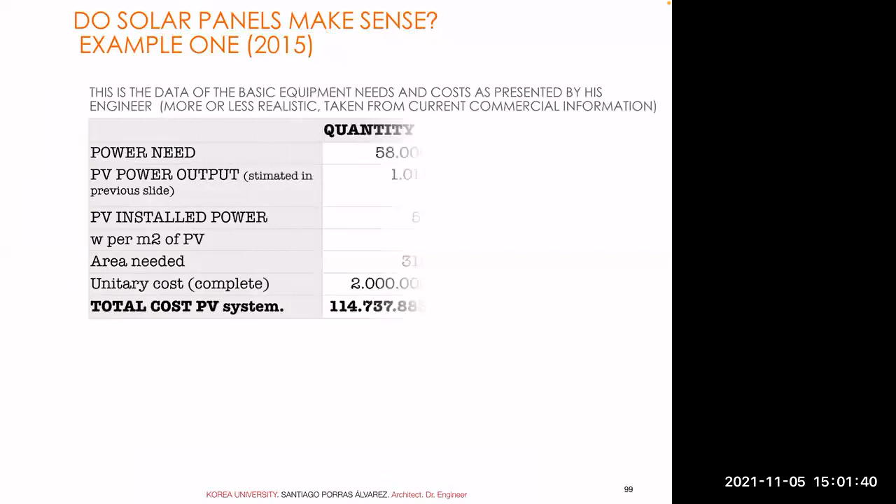We made the calculations. Well, I made. So here's the thing with the panels. I found the best panels by LG at the market price, right? So the first thing you will consider is that you need 300 square meters for a building of 1,000 square meters for just 50% of the energy, right? So you need a lot of space. If you want to have 100% by solar energy, you have no space to put them, because that's the footprint of this building. This building is 330 square meters.

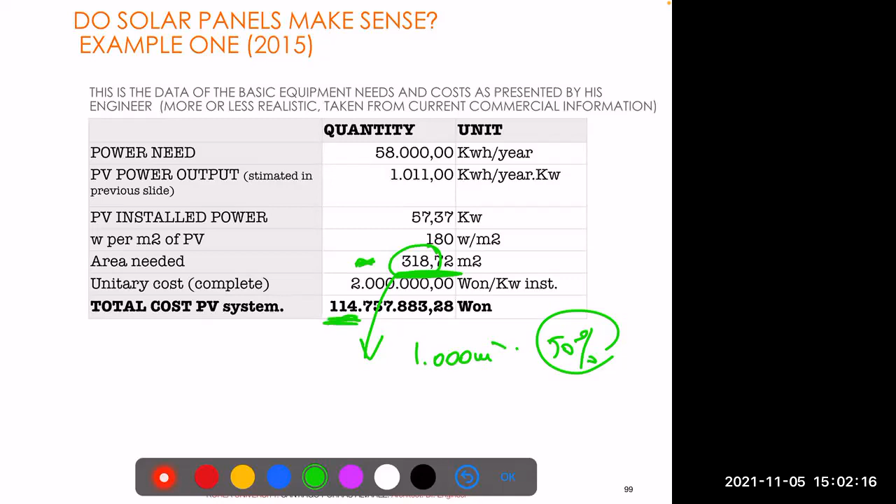So one thing we see, we need a lot of panels. And that was not cheap. This was a lot of money. But then you save money. Well, you know the calculation: if you save 1 million a year, it doesn't mean you save 10 million in 10 years, because the value of money is less year by year. So with the present value calculation, in 15 years there was no payback. You will still pay money. So I did the calculation and it took 26 years just to pay back the investment.

And 26 years, probably the panels are at the end of their life. And I didn't consider that the panels also lose efficiency. I didn't consider the inflation rate in that time. So what's the problem? Something unique to Korea specifically: electricity is crazy cheap for companies. Then there is no reason for doing clean energy because it doesn't pay back.

And probably after 6 years these numbers are a bit better, but come on, who wants to spend money if it doesn't pay back? It's all business and the shareholders are asking for benefits. So when you see those solar panels, they are just a small little bit, just to show it, but really not a significant part of the production of energy.

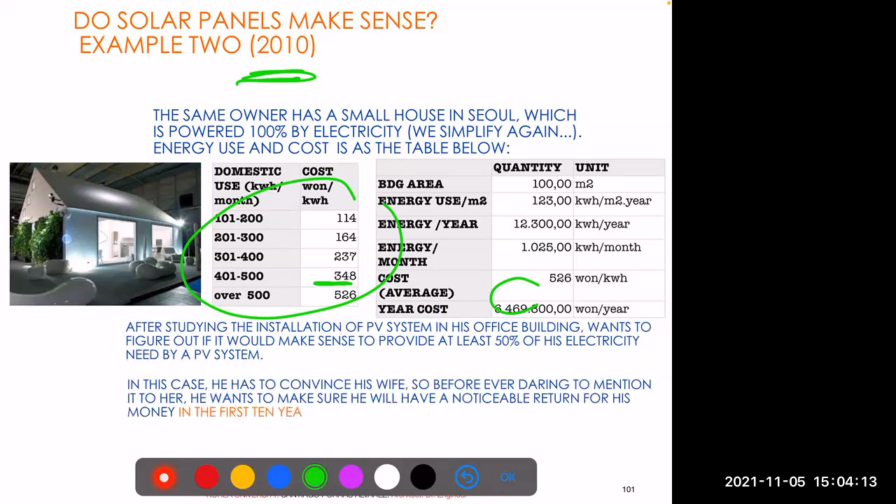So we have the calculations, the cost he had, and again, how it would work with solar panels for just 50% of the bill. This is the calculation. So again, we need to have 40 square meters of panels for a house of 100 square meters. And that's only for 50%. Again, we need a lot of panels.

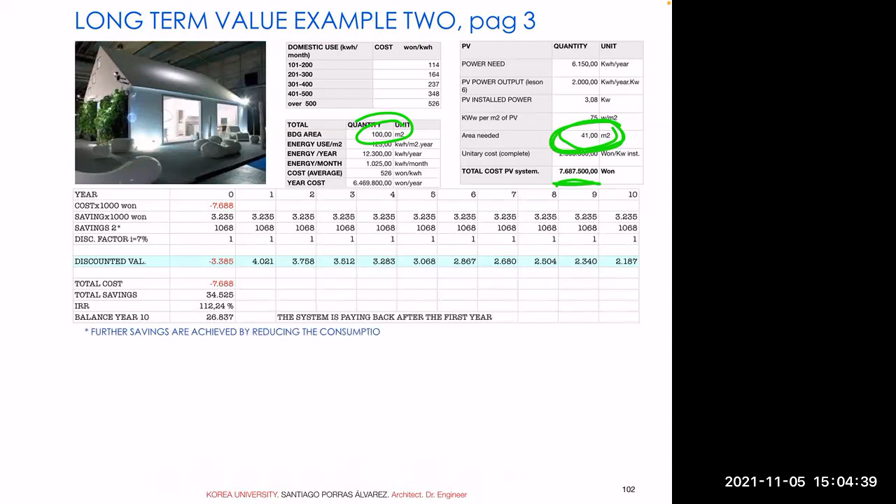The cost for one house, you may think, is not exaggerated, but curiously, in this case, in 1 year the investment pays back. And this is because energy is so outrageously expensive for houses. So if you're doing housing, put solar panels, because there's no question, you will save a lot of money. Then you can speak to your government about how that is planned, right? And you may be a bit more demanding of Samsung and those big guys, because they all work for us, not us for them, and we are paying their bills.

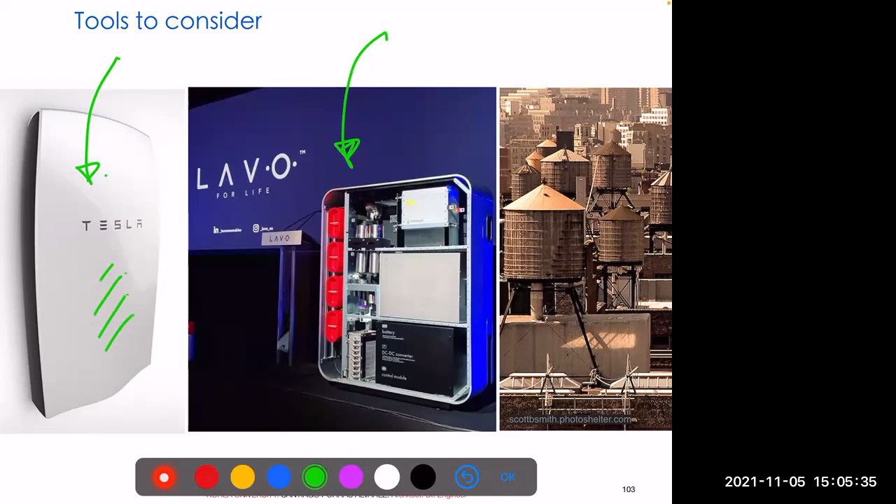Okay, so we have more tools, of course. We already have available batteries in which you can accumulate energy, right? We have a very recent development. Australians are making hydrogen fuel, which can be domestic and safe. It is very expensive and long durable. The problem with solar panels is they produce electricity in the daytime, right? So this may help. And controlling the panels means you have to really plan them, because they will affect the design. This is just a small room.

And we are checking the possibility to accumulate energy in storage in water. But actually you need a huge amount of water to have a little bit of energy, but still there are things to consider in this energy saving. And there are many, many more things. So again, the hour went by. So probably you're disappointed because you say, Professor, what are those details we need for our project? You have to look around, but probably you have some tips which affect the design. And hopefully you will also be clear about how important your decisions are in terms of design.

What's the bottom line? Okay, I would not be the skeptic of the first slide, but I have this quotation. I changed it a little bit. Architecture is my word, but architecture is an assault by man upon nature. It is a human action against nature. A human organism designed for shelter and work, it's a creation. Okay, this is the thing. So any construction is against nature. We are just trying to fight against it. That's true. And this is Le Corbusier, in his book Urbanism, he says that.

Then he says, okay, it is so much an effect on nature that we have to be really serious about what we do. So he was not saying we don't make more cities. Actually, he said it's a city, right? It's an assault by man, but I teach architecture. But that's not the point. The point is that we have to be very serious so that the aggression to nature is compensated by the human activity we put there. So it's not just energy and efficiency. It's about the whole meaning of the buildings we create.

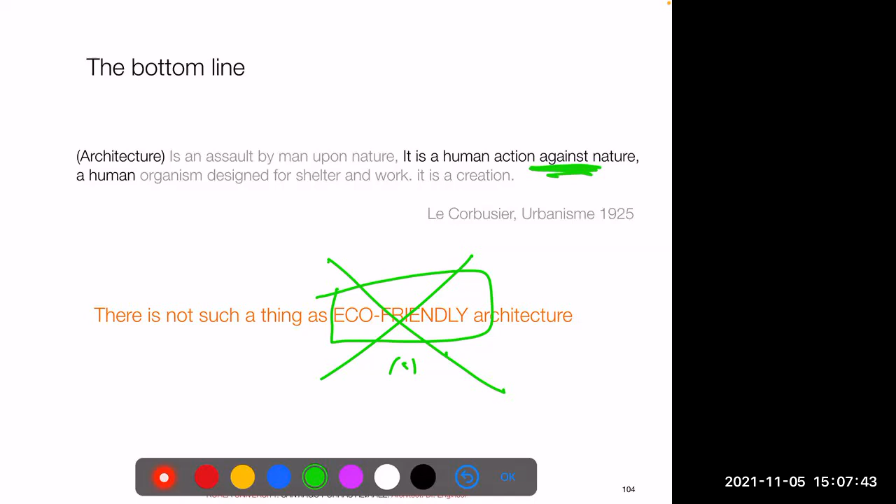These are my final words, and you can ask questions if you want. Good architecture is sustainable by definition, just to some degree. And this degree is what we have to evaluate. This trade-off creates sustainability, right? But if your building is not sustainable, that's not good architecture. And I think that's the bottom line, and what we should consider.

That means that you have to study a lot on good construction. You have to analyze good buildings, not just the famous or very publicized. You need to have a very basic knowledge of things, but above all, you have to be good architects. So please listen to your instructors and do better design over and over.

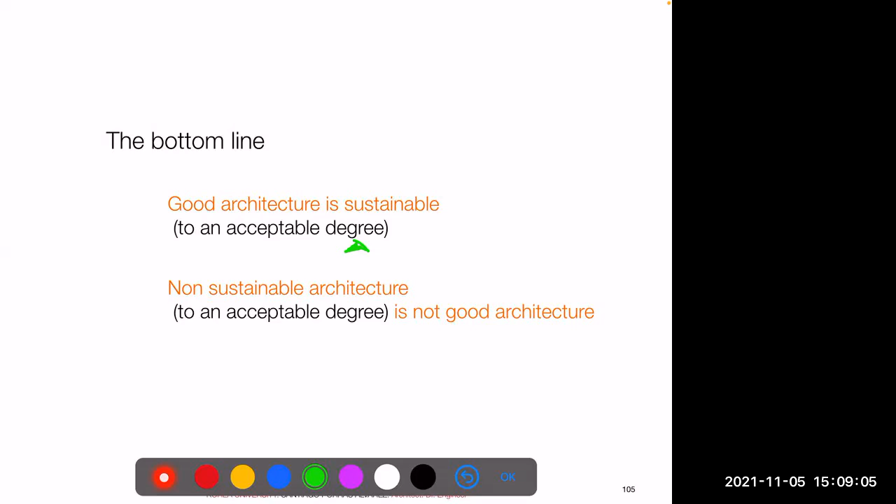Professor Brossa. Santiago, thank you so much. This was a lot, very meaningful, and I learned a lot actually. So I really appreciate having had this initiative. For my students, I decided to join Professor Santiago Porras' class because I thought it would be a very, very meaningful amount of knowledge for the point where we are, as we're developing the project. Of course, he's not giving you the solutions. That's up to you, but he's giving directions, and I think that's what matters.

So there's no recipes for success, but there are strategies, and yeah, I thank you so much. This was a lot. I didn't expect it actually so much. Well, I don't know if I'm happy or not happy because you didn't expect. No, I had this idea, but I never expected the depth of the meaning, and because you've been working on this for such a long time, you were able to compact all this amount of information in a very useful format.

I totally agree that asking someone to talk about sustainable architecture in 1 hour is like trying to kill an elephant with a toothpick. But I think it's more like providing a framework to start even thinking about it. And I think that's very valuable. Right. So it's priceless. Well, thank you so much.

It's a very kind comment. Actually, I told you, I'm so used to this. I don't know if I'm telling things which are too obvious, which everybody knows or should know, but I think there's so much basic, right? That should be like our embodied thought already. Not just as architects, as humans, we have to be part of this attitude of being more, I don't know, more reasonable. Anyhow, that's a very kind comment, and I really enjoyed sharing the lecture with you. If you have any questions, but I don't think we can answer them. Surely I cannot answer them.